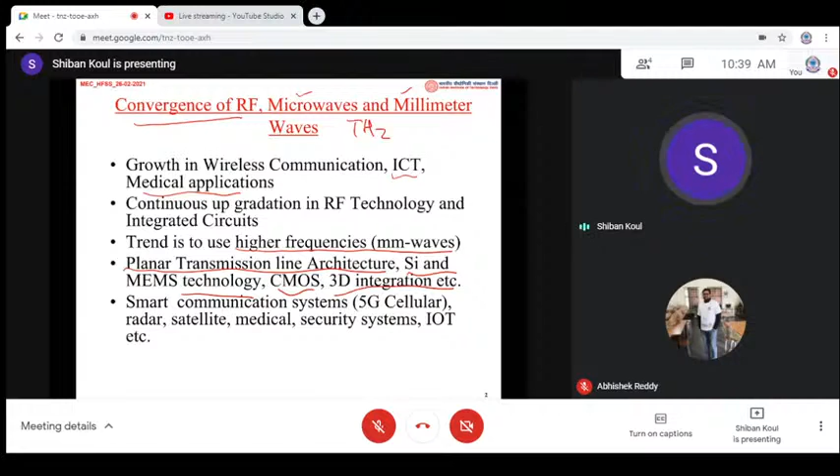The general trend is to use higher frequency. 5G uses 6 gigahertz, 28 gigahertz, 38 gigahertz, 60 gigahertz, and now 6G is going beyond 60 gigahertz. We need to learn about planar transmission line architecture, silicon MEMS technology, CMOS, 3D, GaN - all these technologies. Hyderabad has excellent facilities, both in defense, GAETEC, and other places.

We need smart communication systems - 5G, cellular, radar, satellite, medical. It's very important, the education which we impart to students; they have to be trained so they can get better jobs in these futuristic areas. This is very important.

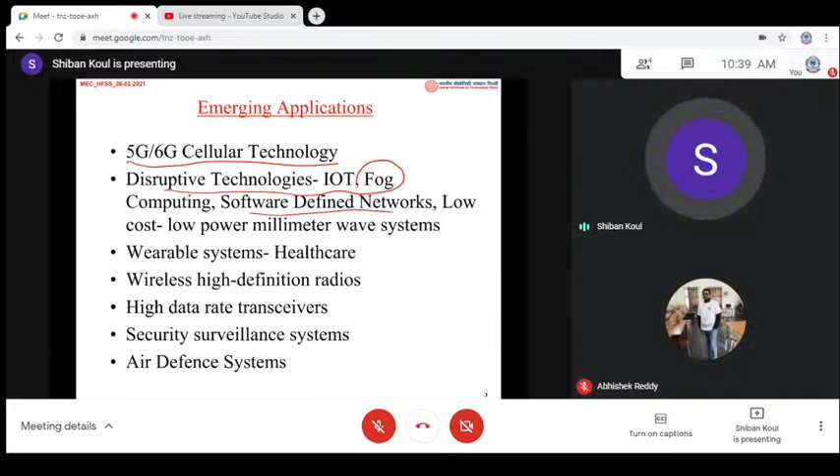These are the emerging areas: 5G, 6G, cellular technology, disruptive technology, Internet of Things, fog computing, software-defined networks, low-cost millimeter wave systems - extremely useful for healthcare. Then wireless high-definition radios, high data rate transceivers, security systems, air defense systems. If students are trained a bit in these areas, they will have a much better future.

We started way back in 1897 with Sir J.C. Bose. He demonstrated millimeter waves, which we now use for 5G - he made polarizers, semiconductor devices, dielectric lenses, which are still at the Bose Institute in Calcutta. Some of his work was reported in IEEE in 1997, an excellent paper on the contributions he made.

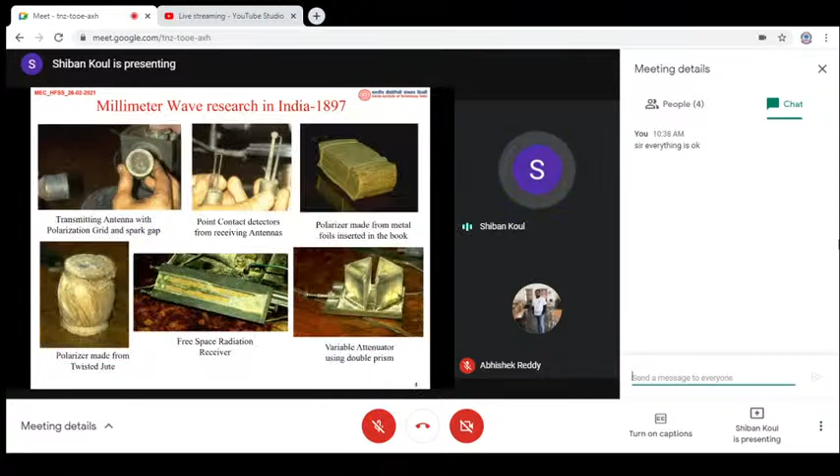At IIT Delhi, we started millimeter wave work in 1979 when we conducted the first workshop. At that time, we didn't know millimeter waves would become so useful that today everybody talks of millimeter waves. These are the things Sir J.C. Bose did: antenna, transmitting antenna, point contact detectors, polarizers made out of jute - he had a vision. Free space radiation receiver, variable attenuator - there was no CST or HFSS at that time, but today we have excellent tools, so we can do wonderful things in India.

This is true, and many colleges don't even have these courses now. They are slowly going into AI, ML - all those things are okay, but I think if you want indigenous development, these are very important, especially with the boom in commercial applications of microwave and millimeter waves. So it's very important.

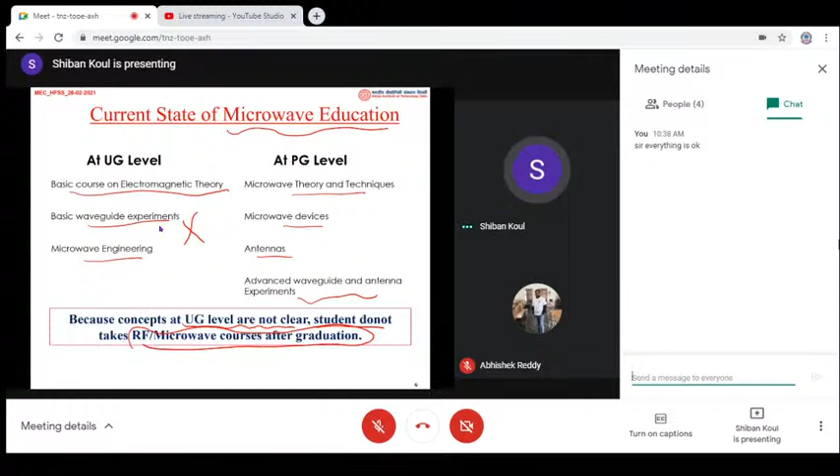The need of the day is to keep abreast of RF to millimeter wave circuit design and technology. It is not desirable, it is mandatory. In future, everything will be in the millimeter wave area. Insufficient design education and hardware exposure is creating a vacuum.

We only teach students how to pass exams; we don't give them hardware education. So there is a need for hardcore RF engineers equipped with design know-how. Like in this workshop, I'm glad that HFSS will be teaching you how to use HFSS for developing circuits, along with practical knowledge.

You have to dirty your hands in the lab to translate these circuits into a practical reality. Keeping in view cost, reliability, and defense application, cost is not a problem, but if you look at commercial application, every dollar makes a difference. So this is not to be done in the industry, this is to be done in the engineering colleges itself.

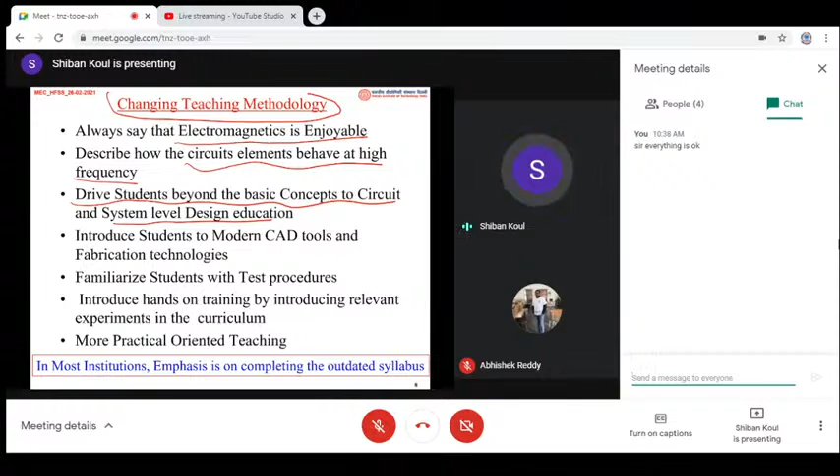It's very important: when a student goes and works with Sandeep, he doesn't have any knowledge. So Sandeep would like to have a person who has some system level or circuit level experience. Then he can use him much better to develop the practical circuits.

We introduced modern CAD tools, and I'm glad that you're conducting this workshop on HFSS, thanks to the HFSS team. We have to also familiarize students with test procedures, introduce hands-on training by introducing relevant experiments in the curriculum. And this is the mantra.

More practical oriented teaching—but in most institutions the emphasis is on completing the syllabus which is already outdated. We are interested in finishing the syllabus, not in how much a student has learned. So we need to change the total methodology of teaching electromagnetics.

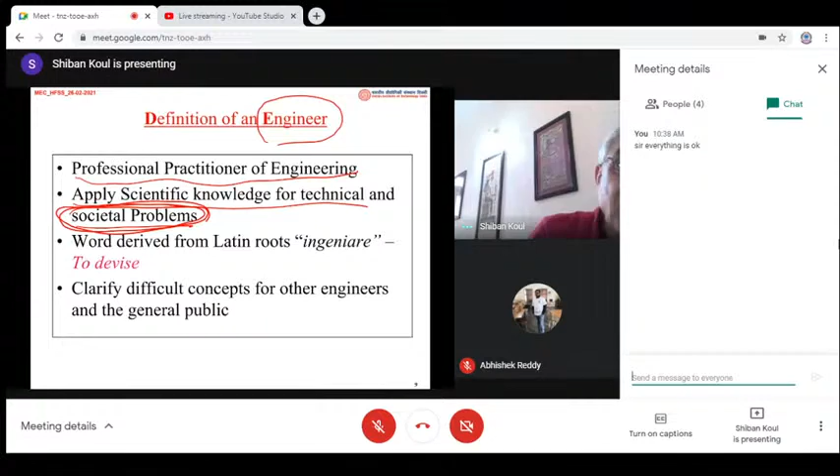Most students who become engineers don't know what their job really is. We don't tell them it's basically a professional practitioner of engineering, applying scientific knowledge for technical and societal problems. We miss this. You have seen COVID—we wanted a lot of societal problems to be sorted, whether it is a ventilator or an X-ray to check whether you have COVID or not.

If you look at the Latin roots of engineer, it basically means to devise. We are supposed to devise, not mug up and pass the exam. Do we do it? No. We have to clarify difficult concepts for other engineers and the general public. We owe a lot to the general public, but we don't actually do anything for the society.

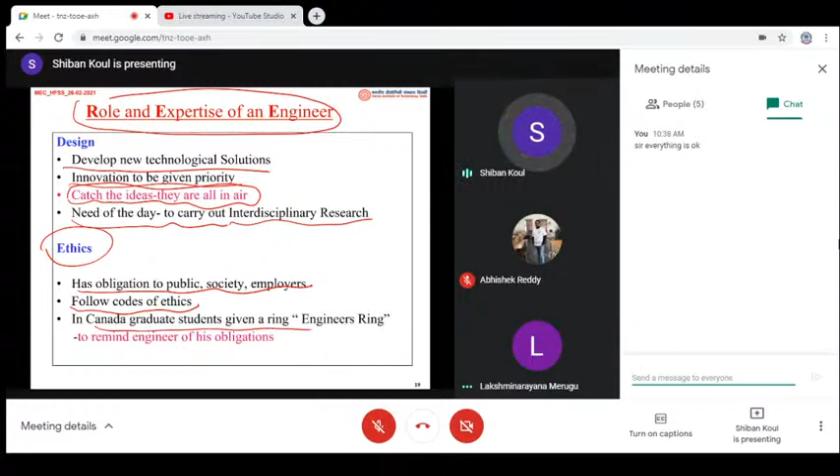College spends so much money—like this HFSS workshop costs money, and MTT-Society supports it. In Canada, they are given a ring called the Engineer's Ring, which reminds you of your obligation. In India we don't give you a ring, but please remember, when you spend 4 years at an engineering college, you have used a lot of taxpayers' money, so you have to give back to society. That's something you need to think about.

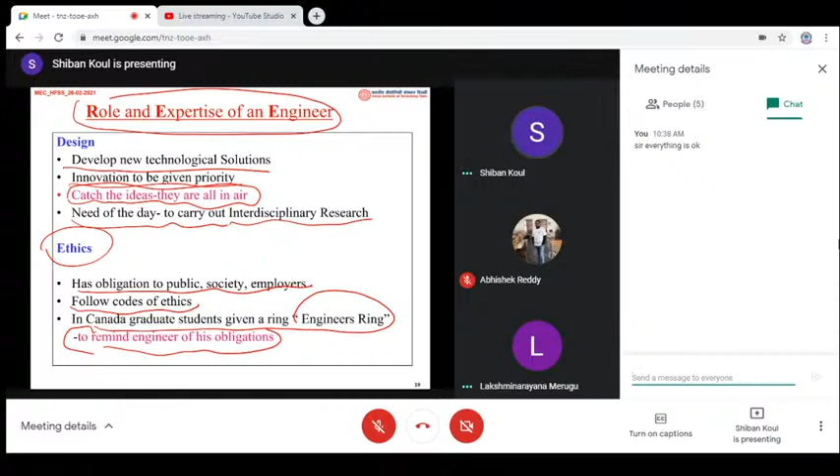Now I will briefly tell you the role of IEEE MTTS. As I said, we already have a problem with the curriculum—it's an AICTE curriculum and it's outdated. We don't revise it, so we ask students to follow the curriculum and complete the experiments. So how will a student get training so that his career is shaped for better things? This is where the society, called IEEE Microwave Theory and Techniques Society, pitches in.

So these are the things—first of all, to get these benefits, you have to be a member of IEEE MTTS. I'm sure Srinivasan made many of you members, but I think in Hyderabad we can have thousands of members. Join MTTS, and you will have access to high quality webinars—I think every day there is a webinar, giving you access to information about the latest technologies. You have distinguished microwave lecturers, speakers, and speaker bureau programs.

So you can make use of it depending on whether you want wireless power transfer, GAN devices, or MMICs—there is a Distinguished Microwave Lecturer available. You also have high quality journals for publishing research work. If you publish the research work, it gives you promotions and it gives you satisfaction that you could do it.

You can do patenting, which is called IP, and you can sell these products into companies. There's also participation in world-class conferences, national and international. International Microwave Symposium is the best, but we also brought a conference to India called IMARC, which is also international.

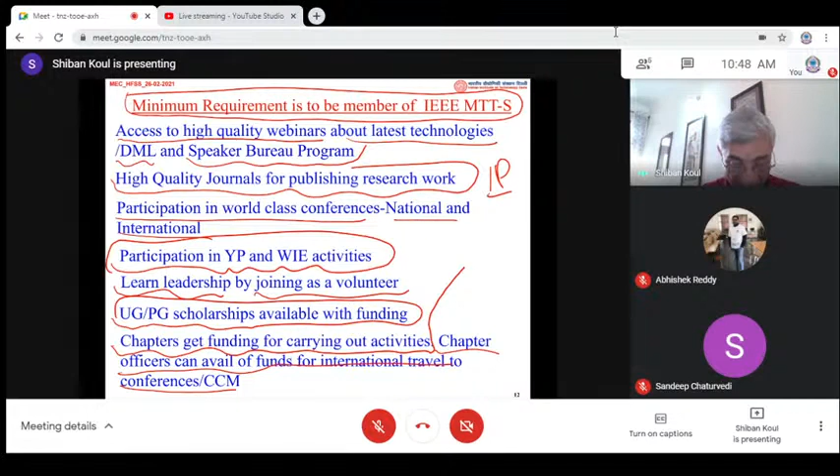Then you have several chapters. They get funding to carry out activities, $1,000 plus $500. If you join a chapter, $500, and chapter officers can avail funding for international travel and conferences to attend the chapter chairperson's meeting. Right now it's all virtual, but from June onwards you can physically attend and meet people. There are a lot of benefits—I can talk for a full hour on the benefits of the society chapters.

Then there are the publications: your Microwave Magazine, then IEEE Transactions. If you get a paper in IEEE Transactions, it's like getting a gold medal. Also Microwave and Wireless Technology Letters, Terahertz Science and Technology, Electromagnetics in Biology and Medicine, and this very recent IEEE Journal of Microwaves.

And then we have Transactions on Radar Systems, Multiphysics Computational Techniques, on Quantum Engineering. It keeps going basically from megahertz to terahertz technology. From India we publish very little, because we don't train our students how to have high quality publications. Maybe we can give a separate talk later on this area.

Then there are conferences worldwide. You can see several conferences going on—APMC conference was in China, then International Wireless Communication conference. Then there's IMARC, which is scheduled for 2021 in Kanpur. Please prepare now and publish papers in that one, and you get an opportunity to come to these conferences and interact with people.

You will learn a lot—ten times more than you can learn by attending a class. That doesn't mean you should miss the class. You should also attend classes, and do this side by side.

Recently they defined the MTT-S scope, and this is basically the spectrum—we have RF device components and circuits. And as I said, you are in Hyderabad, which is basically the father and mother of RF technology. So many companies, GAETEC is there, foundries are there.

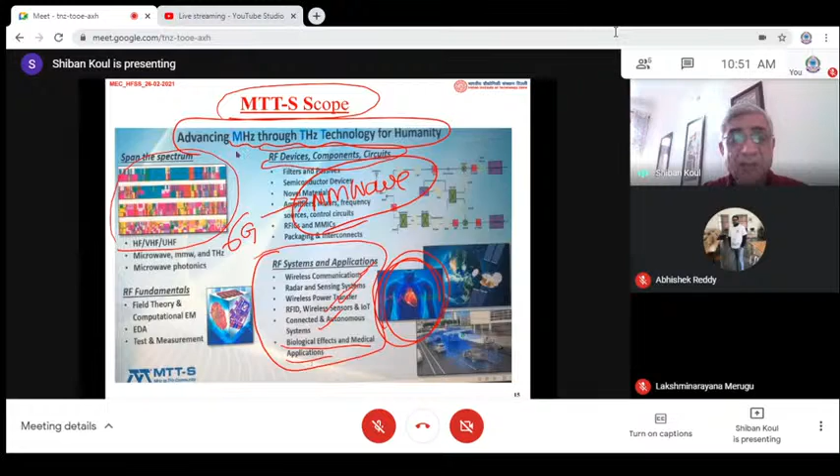Now coming back—this is very important, I have not announced it yet. Hurry and join MTT-S soon, maybe tomorrow, because from India I'm trying to generate some money, and we are now starting scholarships. Thirty scholarships in the beginning will be announced soon; I will send it to all chapter chairs first. This is basically for undergraduate and postgraduate, male and female, equally distributed, for those interested in doing a project with an identified mentor in the RF microwave area. If you get selected—thirty is a large number—you get a fellowship of 10,000 rupees.

All the selected students who do the work will be invited to attend IMARC 21 with free registration and a travel grant to present the work done in the project. Look for this—within 15-20 days you will have this announcement. Apply, but the most important thing is you have to be an MTT member. Please hurry and join MTT-S and you will get these kinds of benefits.

So with these few words about MTT, we will now go to a technical topic, which is basically the development of some antennas for 5G applications. So let's go to part 2.

Low-cost 5G antenna design and development. See, we don't bother about cost in India, and we talk of 5G, which is basically software. We don't look at how do we design antennas for our base stations and handsets, and we don't bother about design and development. So I would like to go through this. This work is done all by students.

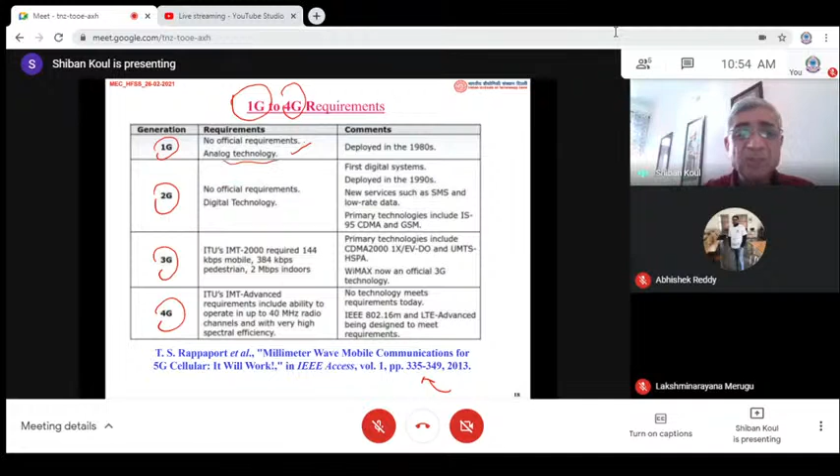So no excuses today. Look at it, we started many years back, 1G to 4G. This is a very good article, 2013. 1G, there was no official requirement. It was basically an analog technology deployed in the 80s. 2G was basically a digital technology, so first digital systems were deployed in the 1990s, and we had CDMA, GSM. Then 3G started basically; primary technologies include CDMA 2000 and UMTS and WiMAX as official 3G technology.

Though we say that in India we have 5G now, we don't have 5G. We still have 3G plus. And people say, I use Vodafone 4G - it's not 4G at all. 80% of the time signal doesn't come. But we are thankful to Jio; they really have an excellent Jio fiber network. You can see this presentation is done on the Jio Wi-Fi.

So 4G, basically, we operated up to 40 megahertz radio channels with very high spectral efficiency, and IEEE 802.16 and LTE advanced. This is being designed to meet the requirement, which is basically long-term evolution, LTE, is 3.5G. So millimeter wave mobile communication of 5G cellular - will it work? Answer is yes, it will work.

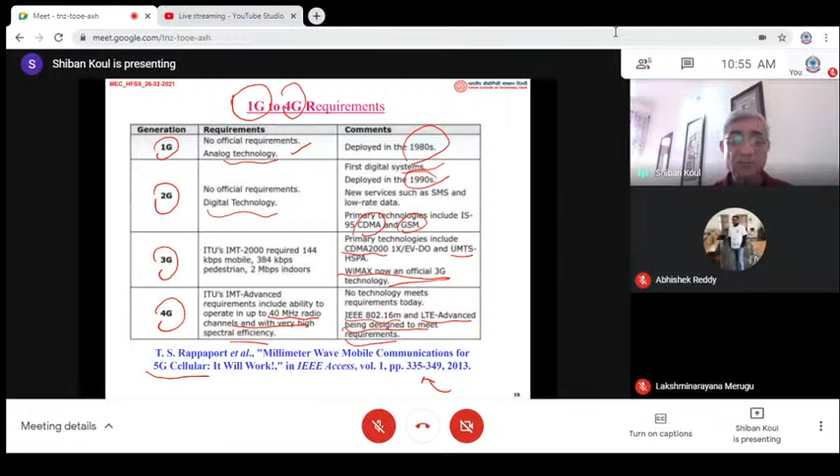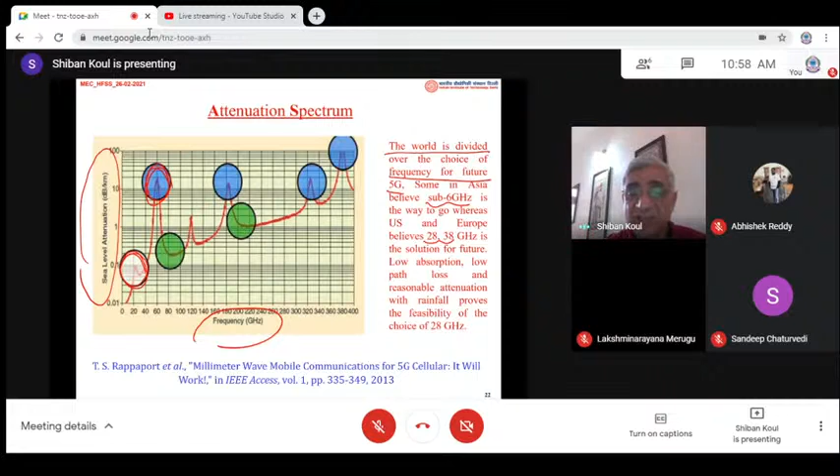The world is divided on the choice of frequency for future 5G. In Asia, some use sub 6 GHz, Europe uses 28, 38 gigahertz, and some are thinking of 60 gigahertz. The main problem is balancing low absorption, low path loss, and reasonable attenuation with rainfall. 28 gigahertz is advantageous, but people have to move to higher frequency because of data rates.

There's a nice article from 2013, 'Millimeter Wave Mobile for 5G Cellular: It Will Work!' 28 gigahertz has been identified, 38 gigahertz another, but in Japan they're looking at 60 gigahertz for short range links, with 6G going beyond this frequency. So we need antennas with high gain, diversity, and phasing, and most importantly very low cost for commercial application.

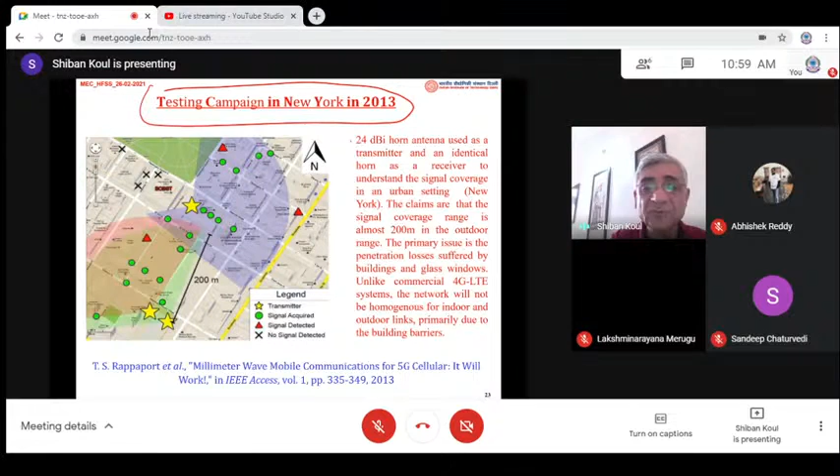In 2013, there was a testing campaign in New York, which is very congested. They used 24 dBi horns as transmitter and identical horns as receiver. The distance where transmission was possible was around 200 meters; otherwise there was a lot of path loss and signal coverage disruption because of buildings. So typically about 200 meters outdoor range was found by the researchers in this campaign.

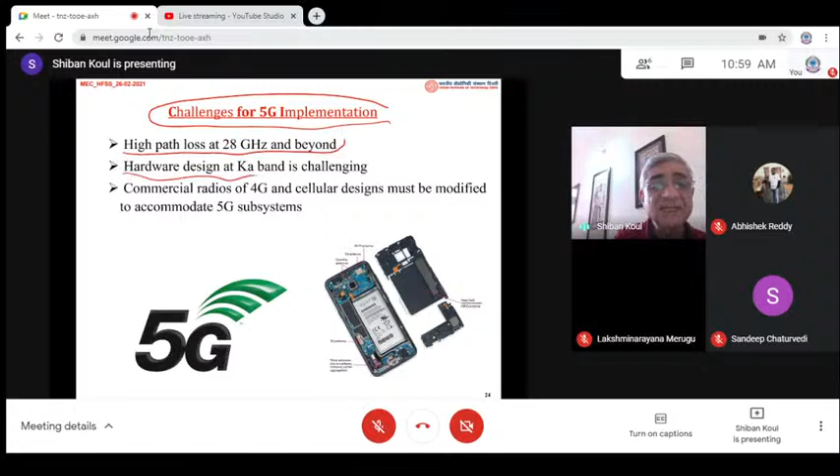What are the challenges for 5G implementation? We have high path loss at 28 GHz and beyond. Hardware design at Ka band is challenging. Commercial radios for 4G and cellular design must be modified to accommodate 5G. We don't want to throw away 4G - can we have 5G in it?

This is a typical mobile handset. Can we have some antennas in this which will basically be 5G, while already having 4G built in, so both 4G and 5G are combined into the cellular phone? Then the cost will be much lower.

Requirements of a millimeter wave 5G mobile terminal: high gain greater than 9 dBi, beam steering or pattern diversity, impedance bandwidth greater than 1 GHz, angular coverage at least 60 degrees, and it should fit inside commercial smartphones. Typical size is 150 by 60 by 6 millimeters. I don't want to do research where I make a 300 by 300 by 300 millimeter antenna.

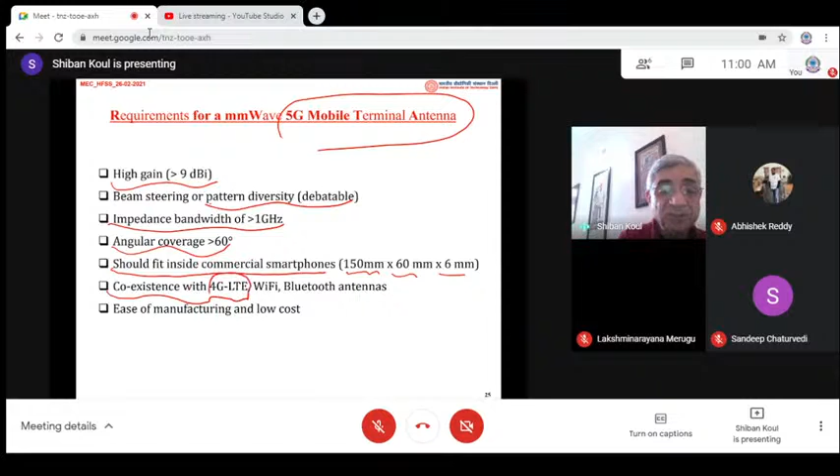Nobody will take it. Can this coexist with 4G LTE, Wi-Fi, and Bluetooth antennas? It has to be very easy to manufacture and extremely low cost - the antenna should be $1 or $2. Then only will commercial companies be interested.

So it's very important to draw these things out on paper before we actually start developing them.

Samsung did pioneering work on phased array around 28 GHz. They looked at propagation loss between transmitter and receiver. An isotropic transmitter-receiver at 30 gigahertz has very high loss theoretically, while an isotropic transmitter-receiver at 3 gigahertz has very low loss. But we can use an array at 30 gigahertz to get very low loss too.

A patch antenna at 3 gigahertz is 60 millimeter by 60 millimeter. We can make an antenna array at the same 60 by 60 millimeter size that works at 30 gigahertz. So we can use a small phased array in the mobile, and have this work for 5G applications.

The path loss issue could be overcome by using high gain antennas on both mobile and base station, but locking the beam is a very tough job. People are still debating whether millimeter wave beamforming is an enabling solution, or if there are problems - this paper describes those problems. So people are thinking, should I use phased array or pattern diversity? This is still debatable, but loss at 30 versus 3 gigahertz is considerably different, at least a factor of 20 dB.

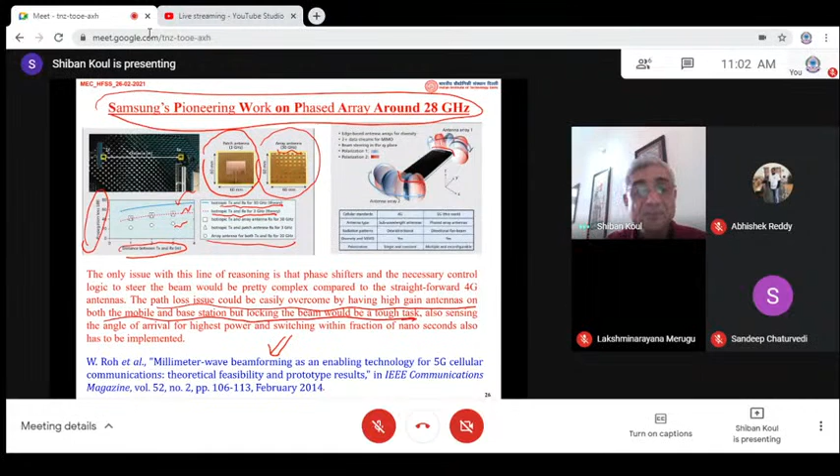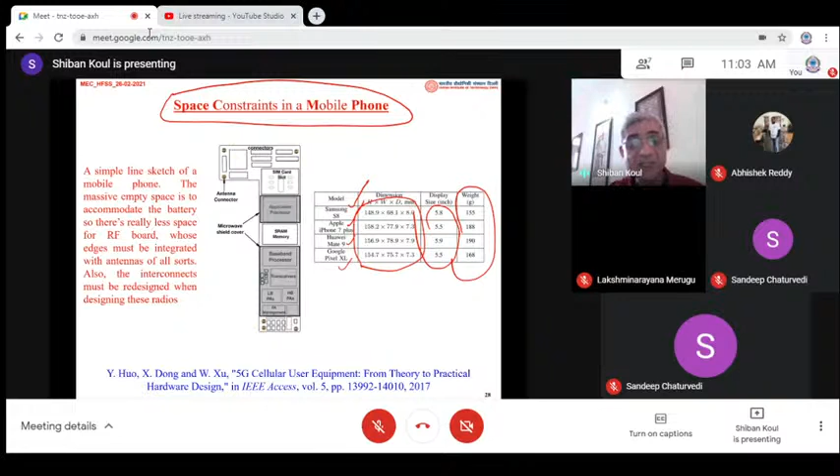Then we have space constraints in the mobile phone. If you look at a mobile phone, half of it is practically the battery. Looking at Samsung, iPhone, Huawei, Google, the size is very small, display size is 5.8 inches, and the weight is limited. So we have to try to accommodate 5G antennas into this phone to get the functionality, without having to redesign everything in the phone.

So this is a typical 4G current phone. Can we introduce an antenna on the periphery of the same phone, which would be a millimeter wave antenna, with control signals, so that it becomes a 5G phone? There are papers as old as 2017 on millimeter wave 5G antennas for smartphones, and a lot of research has been done in this area, but nobody knows which is the correct solution. We already have Bluetooth, GPS, and LTE antennas, so we have to find some space in the mobile for future 5G applications.

Our students found there are several research gaps in 5G designs. Most reported designs are planar in nature, hence creating a large footprint, and I cannot fix that in a mobile. I can publish a paper, but I cannot fit it in a mobile. So this is the footprint of a planar antenna.

So what we thought was, can we do a corner bend? If I bend this antenna, it will save a lot of space. Second, with a planar antenna, the radiation is quite a bit towards you. But if we use a corner bend antenna, I can direct it towards the base station, which helps radiate the signal away from you, and you get less SAR by using the corner bend.

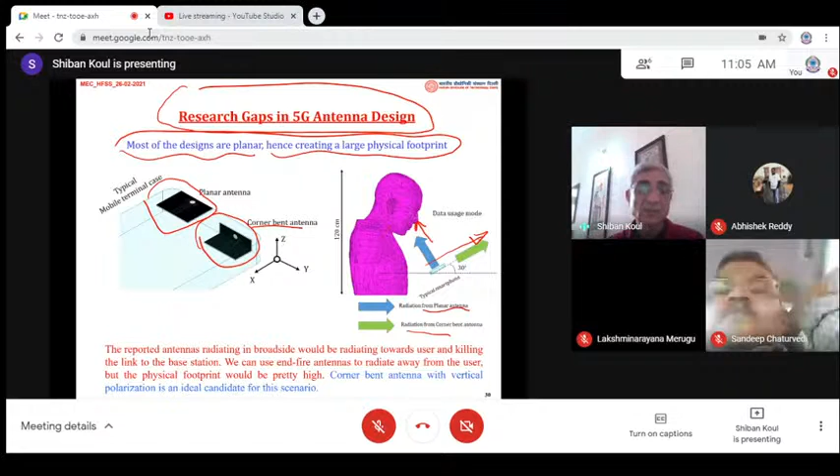So this was the starting point for our students - can we do a corner bend antenna? We went ahead with it and designed a conformal wideband slot antenna for 5G applications, published in 2019 in IEEE Access. We use a coplanar waveguide here, with a slot. You can use HFSS to optimize this, and you can go through the paper in detail.

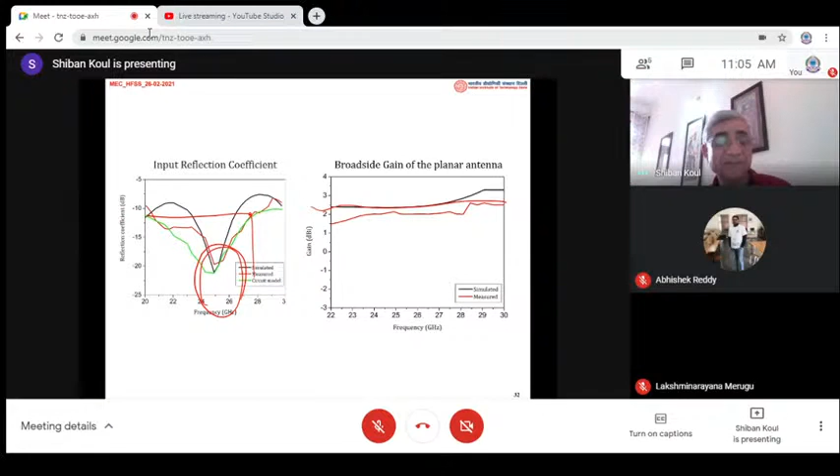So this is a very nice antenna which works. The footprint is 20 millimeter by 16 millimeter, but it's too big to be attached to a mobile. We see the broadside gain is typically about 2 dBi, and the input reflection coefficient around 25, 26, even 28 gigahertz is better than 10 dB. We can change the dimensions to accommodate 28 gigahertz. These were initial studies, but the gain is still low. These are the patterns at 28 gigahertz - reasonably good.

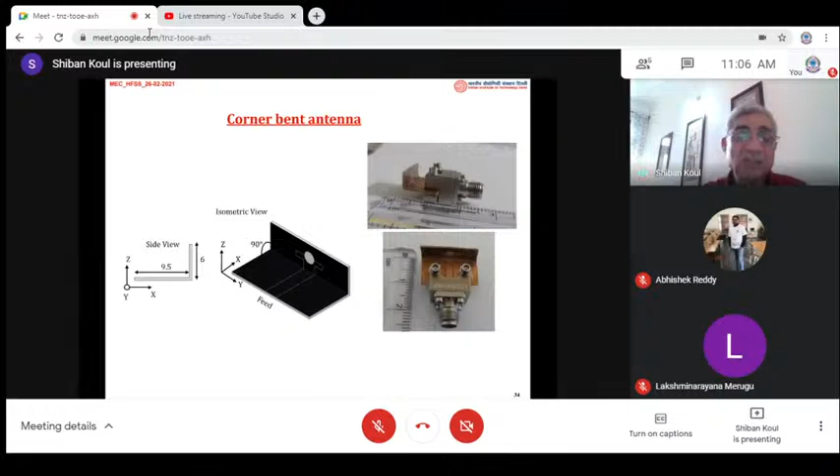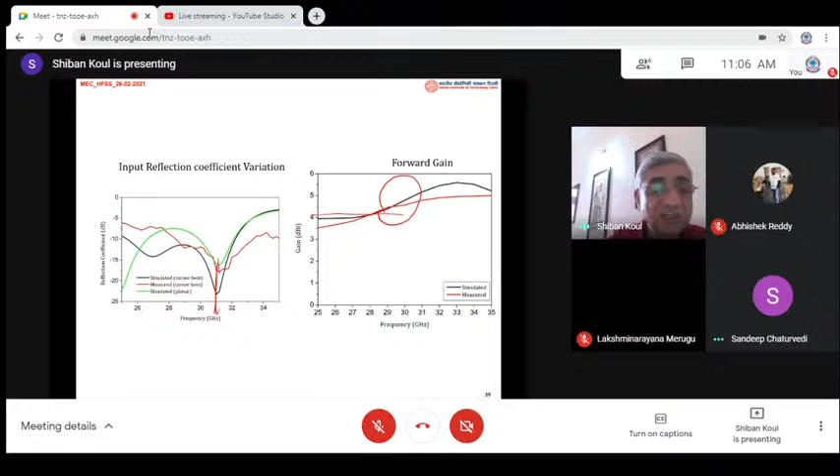Then we looked at the corner bent antenna - can we bend this antenna? Yes, it was bent, and using a southwest connector we can connect this and get a nice corner bent. Now the footprint becomes very small, 9.5 millimeter by 6 millimeter, so I can fit it in the periphery of the mobile. The gain improves - forward gain becomes 4 dBi, and the return loss around 28 gigahertz is about 10 dB.

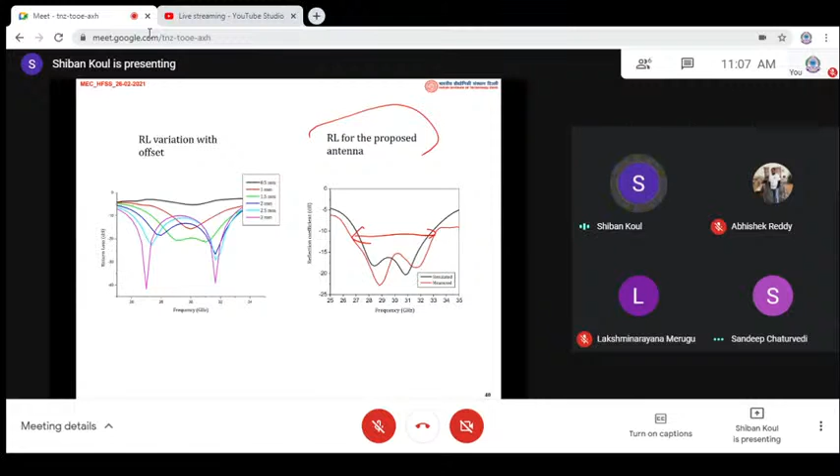Return loss of the antenna now is very broad. Bandwidth is large, and with offset, we can change the offset and see different characteristics.

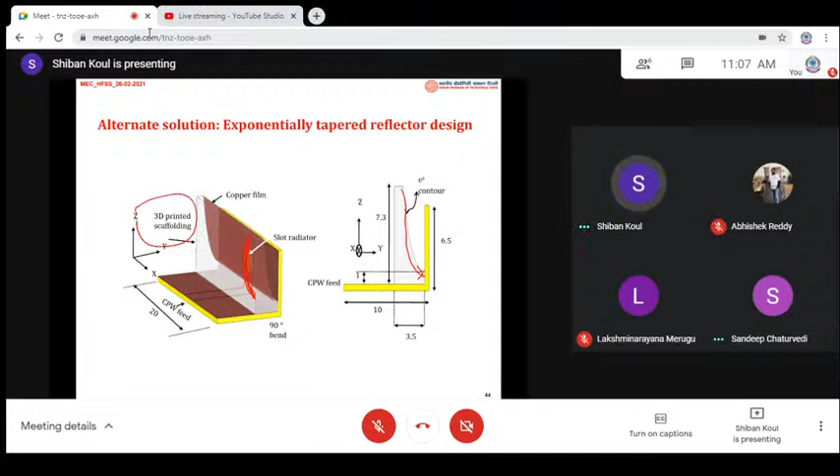Now the next thing is, instead of having this one, can we have a 3D printed copper film, and have a contoured reflector to get much better characteristics? So this was done using 3D printed scaffolding, and we had an exponentially tapered reflector design.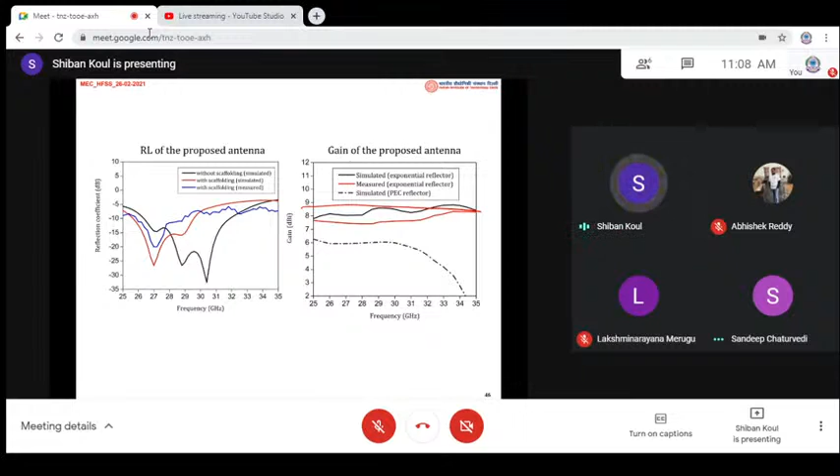The ultimate aim is that it should directly fit into the mobile. This is the patterns at 28, 30 gigahertz, showing the co and cross polarized patterns.

Now, when you look at typical uses of the mobile phone, we can use it in portrait mode or landscape mode. When we have to do data or make a call, we use portrait mode, or when we have to send an email, we use landscape mode.

So there is the problem of the phased array. We can have this antenna, combine multiple antennas, and get the beam scanned in different directions. This is the concept of the phased array, but there are problems.

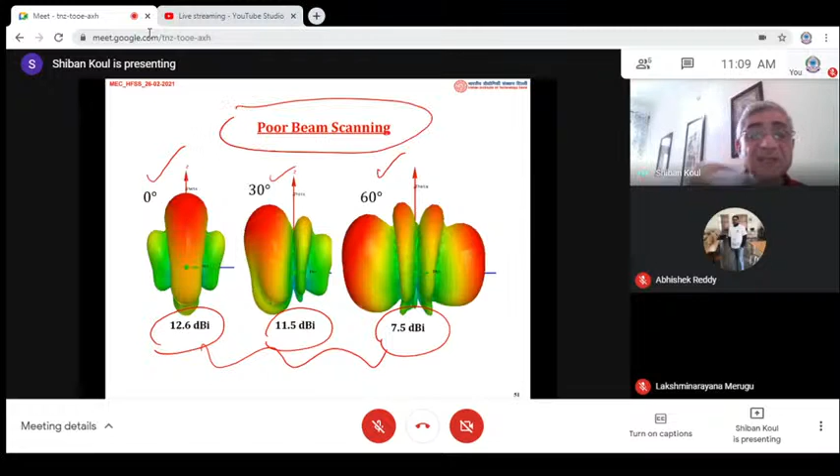What is the problem? At 0 degrees we get 12.6 dBi, at 30 degrees 11.5 dBi, at 60 degrees 7.5 dBi. So we need to compensate for this gain, and there's poor beam scanning as far as the phased array is concerned. So we decided on an orthogonal pattern diversity module to overcome this problem.

This is your radiating element, and this is your feed element. This is how the details of the radiating element are. This is also very recently published by us. This is a coplanar feed, and this is the radiating element for the pattern diversity module.

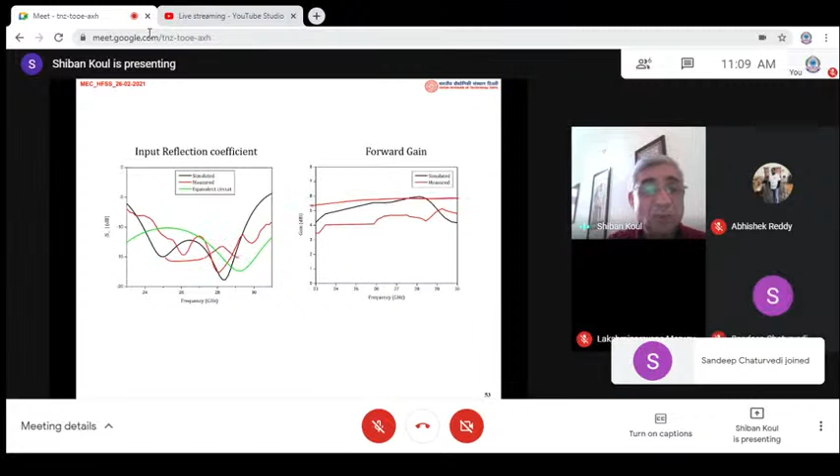Then we can check the gain, which is about 5 dB, and the return loss is very nice over the frequency of operation. Patterns are very nice.

Then we use the FSS structure and analyze this separately so that we can have gain enhancement. So we use this as a reflector here, and then we do corner bend for this antenna the way we did earlier. So we have a nice antenna.

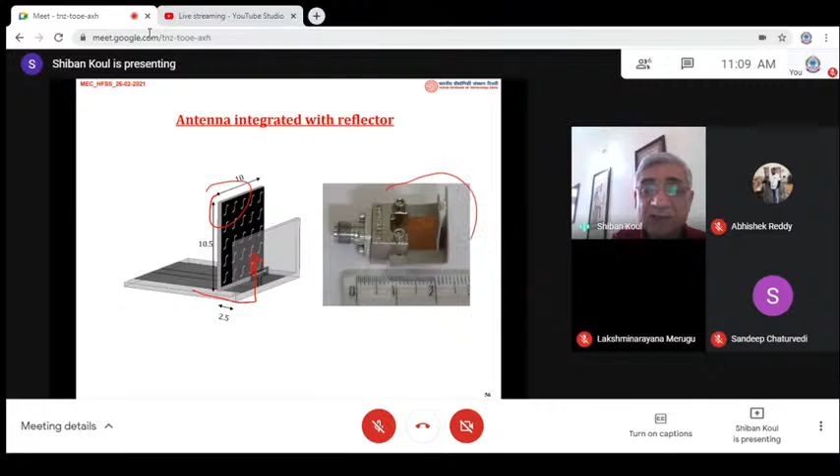Integrated with the reflector, we can get almost 6-7 dB gain and a very good return loss over a broadband for this particular antenna. These are the H-plane patterns, these are the E-plane patterns for this particular antenna.

This is the 3D pattern without and with FSS at 28 gigahertz. It's very interesting results we are getting.

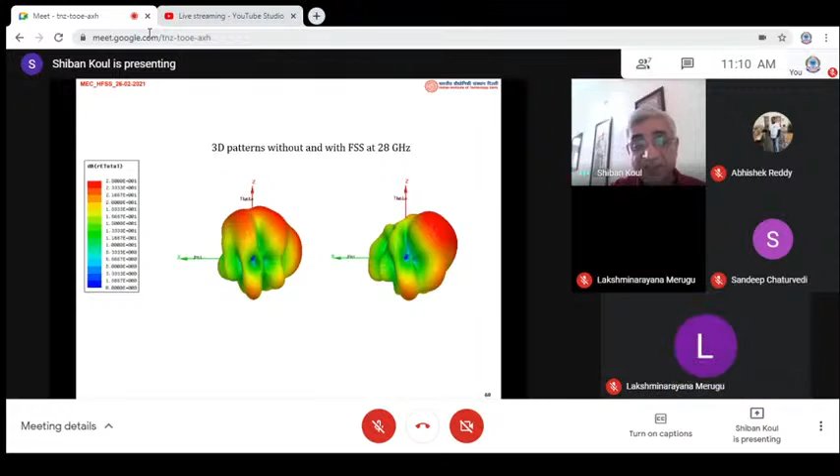So we can have much better results, because whenever we go to 5G, a lot of questions are asked. One person who frequently asks this question is our own close friend from IIT Bombay, Girish, who always says it has health hazards. So whenever we propose designs, we should take into account the specific absorption rate. This is very, very important.

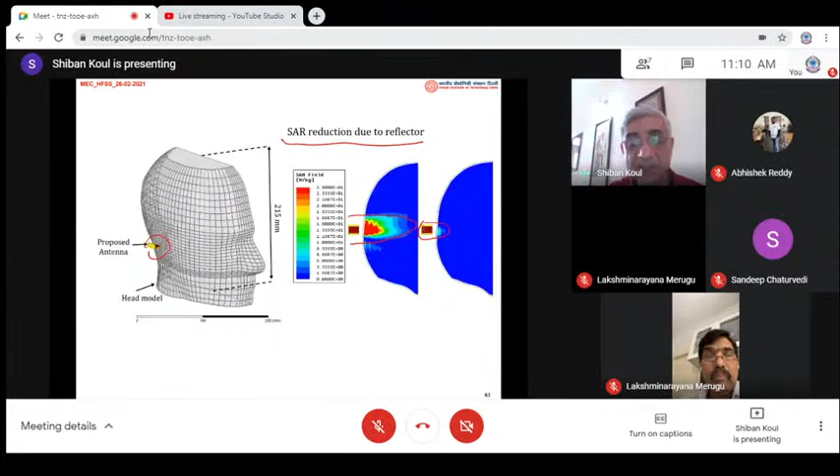So this design gives you much lower SAR. Then we can use one antenna at port 1 and one antenna at port 2, which gives me pattern diversity with the conformal antenna.

So I can have the patterns for both the cases, which eliminates the need for a phased array.

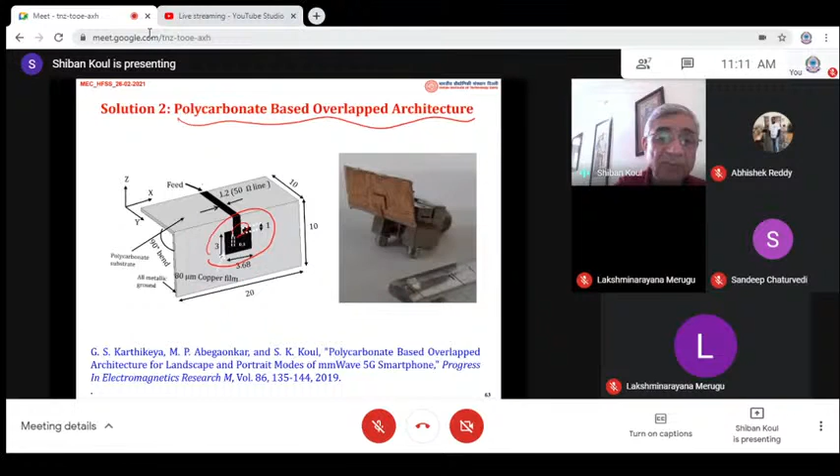The second design is a very low cost polycarbonate based antenna. We use a patch inset feed on polycarbonate substrate, and this has also been published very recently. This is how the antenna looks, and it's less than $1 to manufacture.

We can design another one, basically a tapered slot antenna fed by microstrip, with a quarter wave transformer, again designed on HFSS. This is how the fabricated antenna looks, and then we have both of them overlapped.

This is your slot antenna, and this is your tapered antenna, and together they become a pattern diversity module. The coupling is better than 30 dB between the two antennas, which is very good for practical applications.

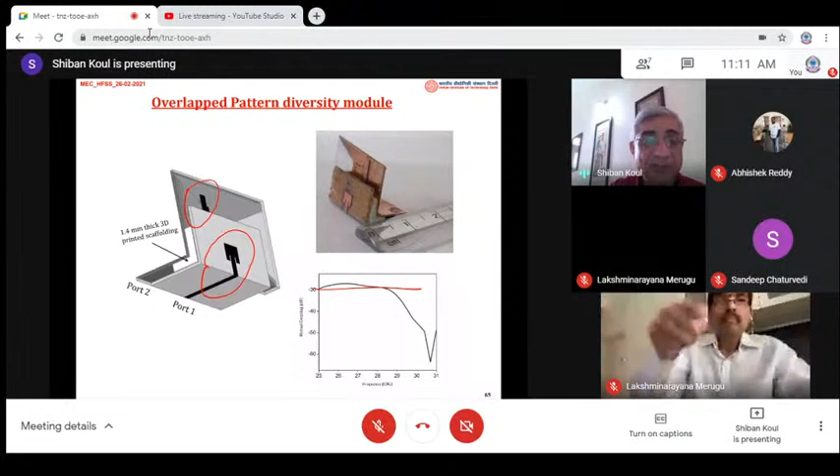This is the E-plane pattern in portrait mode, and this is the pattern in landscape mode. So basically, these diversity modules work very well for a practical application.

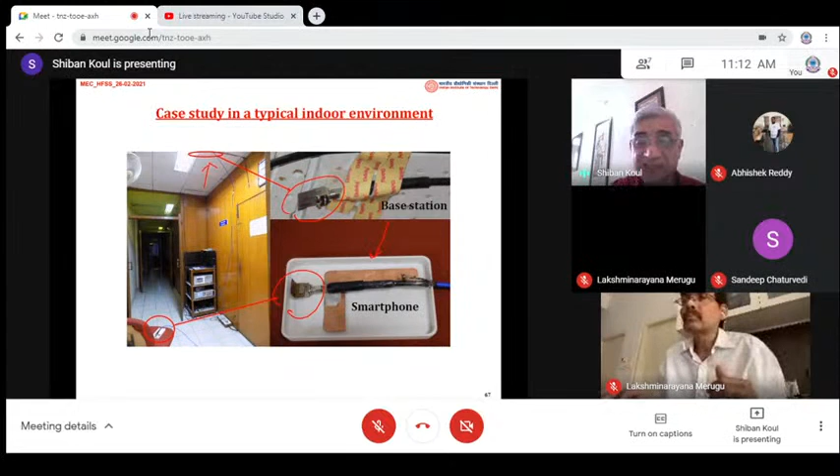The next thing is to test it. So we did a 3D molding of a mobile phone, a smartphone, and mounted these antennas on top, basically on the roof, and did the testing. We wanted to check whether the portrait mode and landscape mode signals are detectable.

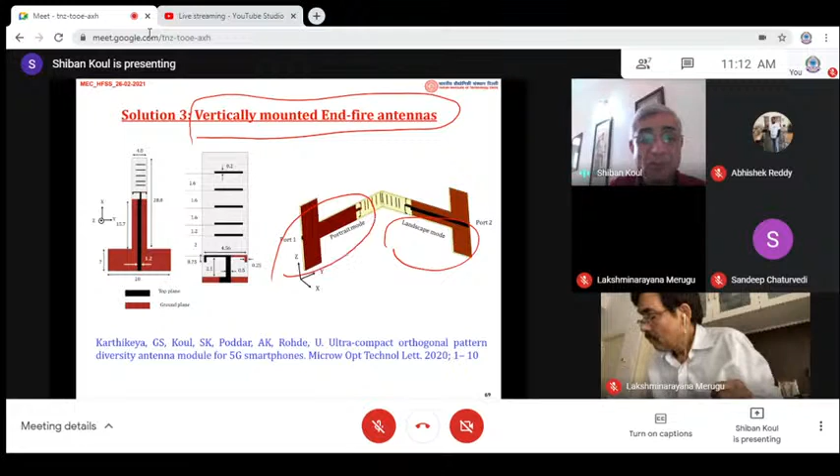So going ahead, we did several other types of antennas. This is a vertically mounted end-fire antenna. We have this portion for landscape mode, this portion for portrait mode, and these are various radiators. This was also done in 2020, very recent.

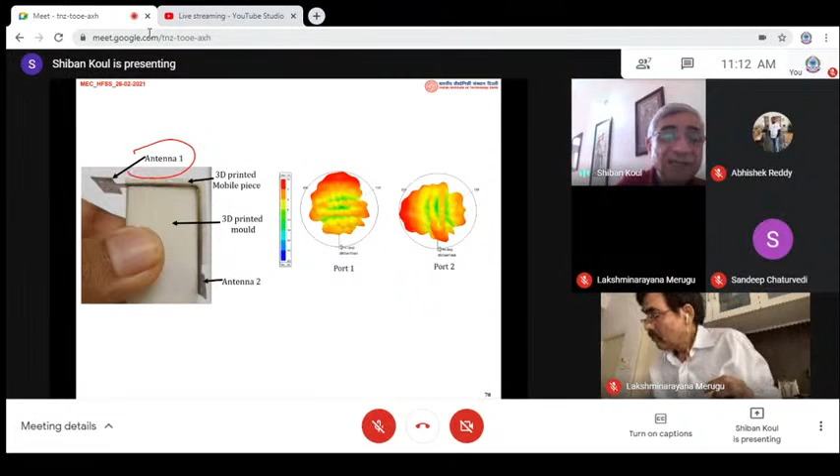This work is very, very recent. If you look at antenna 1 here, this is a 3D printed mobile piece, and this is the second antenna. So these are how the antennas will be fitted onto a practical mobile. This is port 1, port 2 patterns, which takes care of the diversity.

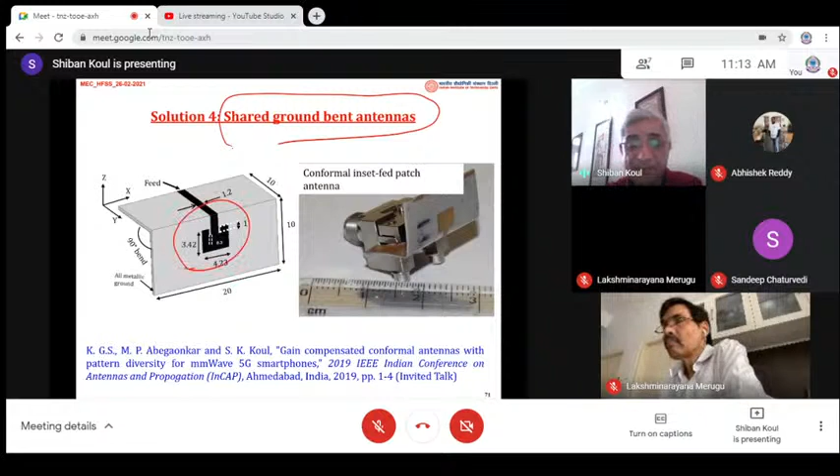The next antenna we did is a shared ground plane bent antenna. We took this antenna, which we showed earlier. This is also a very recent paper which we have published, using the corner bent antenna. This is one of the antennas, a conformal inset fed patch antenna, which has been developed by the students.

Then we use the earlier tapered slot antenna here as the second antenna. So we have a tapered slot antenna here, a tapered slot antenna here, and then port 1, which is basically a microstrip patch antenna.

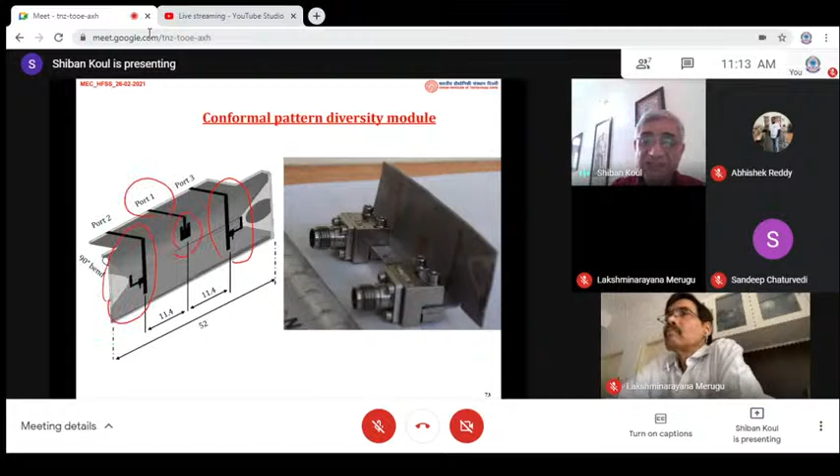This is how an antenna module will look like, which will go into the mobile antenna. There are 2 tapered slot antennas and 1 microstrip patch antenna to take care of the pattern diversity. We can see the beam here, beam here, and beam here to take care of all 3 directions, with mutual coupling better than 40 dB between these 3 antennas.

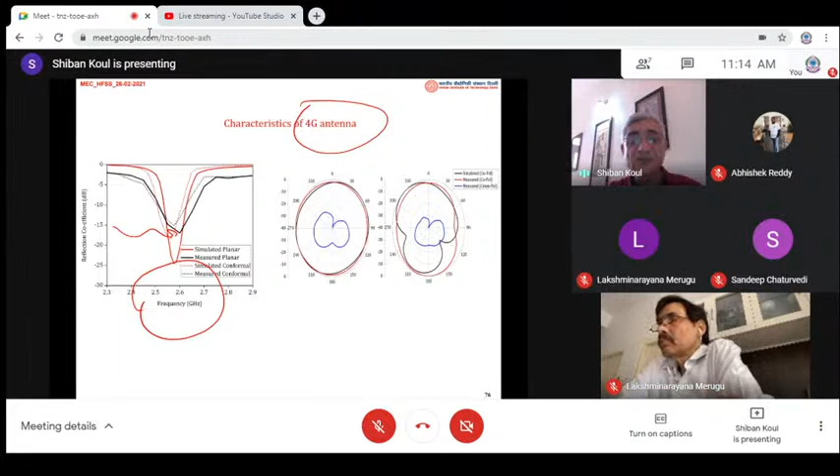If you look at the 4G characteristics, in this particular band it radiates well, the reflection coefficient is very good, and these are the patterns for the antenna. Then we can do 4G MIMO by using 2 antennas, and this can also be integrated onto the same mobile.

Then we can do a 5G antenna, and as I showed you earlier, we can use basically a corner bent antenna, which is a microstrip patch antenna. So we can use at port 1 one antenna, at port 2 another antenna for diversity, whether it is portrait mode or landscape mode.

So basically we can now have a very sophisticated antenna with 5G pattern diversity. We can have 4G antennas, 4G LTE, 4G MIMO, and millimeter wave 5G. This is a very, very small antenna which takes care of both 4G and 5G, and can be very easily fitted onto a mobile phone.

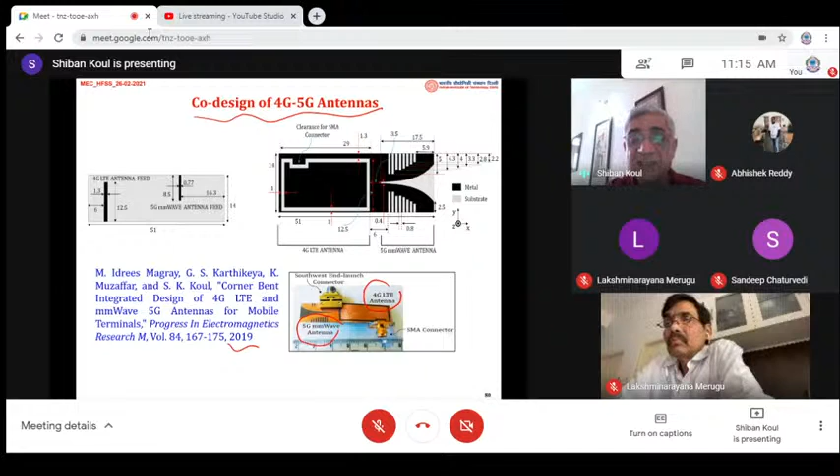So these are other types of 4G antennas which we have done in 2019. It's a very, very small 4G antenna, a slot antenna, and then 5G millimeter wave tapered slot antenna. This is how the layout looks for the 5G antenna, and this is how it looks for the 4G LTE antenna. These are the feed lines for both, and these are the input reflection coefficients for the 4G and for the millimeter wave antenna.

So that means we can make one antenna which basically works for 4G and 5G. This is important because we don't want to throw away the existing mobile. We can integrate this antenna so that both 4G and 5G functionality will be there in this particular mobile.

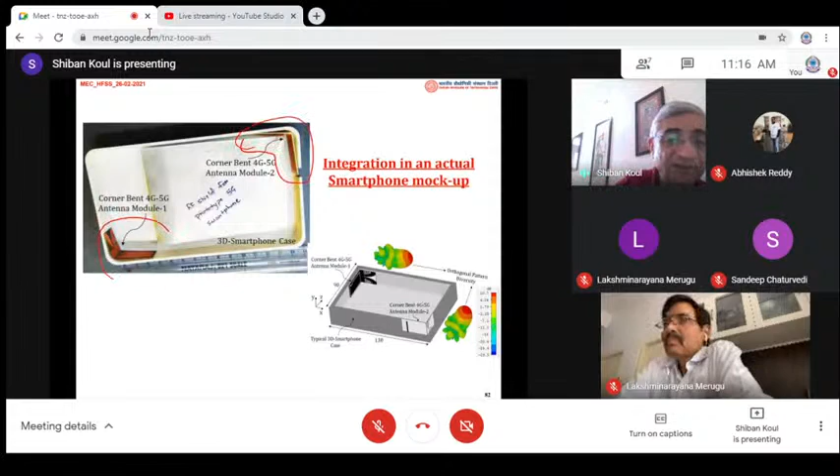So you can look at it. Now we did this corner bent antenna module fitted in the mobile case, and this is corner bent 4G, 5G module into the second corner. This is how it will look like, one corner and another corner of the mobile. This is 130 millimeter. We kept the same dimension, 130 to 90. So this is a typical mobile phone using the 3D.

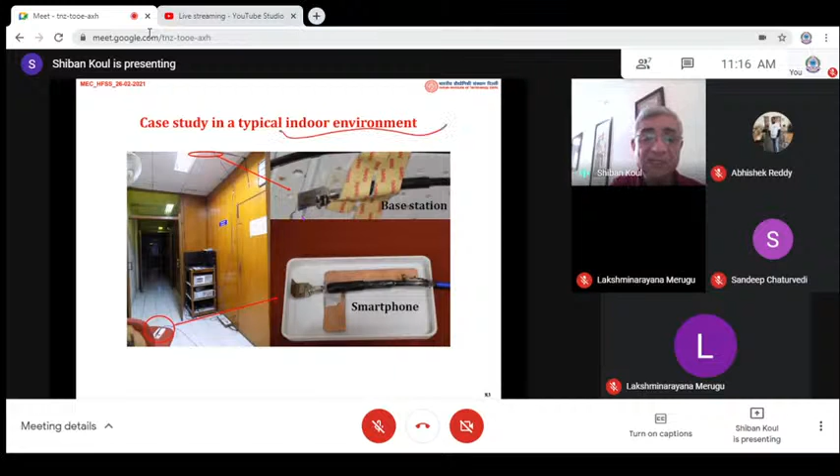And this is your orthogonal pattern diversity from these two antennas. This is an integration into an actual smartphone mock-up. Then we did the case study in the indoor environment. We put these antennas and did it the same way I showed you earlier. We can pick up both 4G receive powers as well as 5G receive powers in an actual scenario. This proves that we can develop very sophisticated antennas for both 4G and 5G.

This is some of the recent work we have done, and there's a lot of literature we have written. In January 2021, last month, we wrote 3 articles on these compact antennas. Article 1 on compact antennas for future 5G smartphones, part 2 is compact antenna for future 5G smartphones, and compact antenna future 5G pattern diversity architecture. This is freely downloadable from the Microwave Journal website. Please go to the website. These 3 articles will give you insight into the latest technology about the future 5G thing.

I and one of my students compiled the work we did, many other designs. Since we have lack of time, we can't cover those designs. So the first book on millimeter wave antennas for 5G applications, which is basically for mobile as well as base stations—I didn't cover the base station antennas, I covered only 5G. This has come out basically in November, December from CRC. These are available online, basically as an ebook. So read these articles, you will get a fairly good idea.

As I said, we used HFSS to design most of these antennas. Since you have a workshop today, make best use of this workshop to learn. This is all done by our students, so you're also students, you can also do exactly the same thing. And there are other interesting talks by the speakers next to me, and also tomorrow Sandeep is there. I think you will get a lot from this workshop.

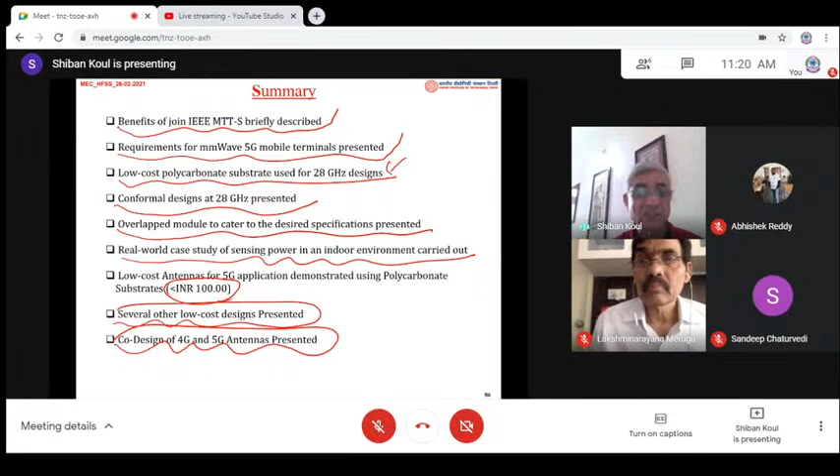And many low cost designs were presented, and if you download this ebook, they are all there. Co-design of 4G 5G antennas was presented. See, we have to understand companies have invested billions of dollars, they don't want to suddenly change everything. So you have to actually sync your thoughts with the thoughts of the company, and then it is possible to actually do meaningful designs.

And with this, I think we come to an end. I acknowledge all my colleagues at IIT Delhi, my PhD students from CARE, Indian Institute of Technology Delhi. As I said, most of the designs, in fact all designs, were done by HFSS. I'm really grateful and thankful to the HFSS team. I don't know whether they are listening to this talk, but Srinivas can give a special thanks to the HFSS team for supporting IIT Delhi and for supporting your college.

We will have many more workshops in future where we will present the actual hardware, and maybe at some point we can do an antenna design workshop where we show you how to fabricate it in your own lab and test it. This is what we will do in future so that you get much more confidence. Grades are important, but I think it's more important to do something with your hands. That's very important.

I'm really thankful to all of you, and to the principal for asking me to give a talk today. I hope you got some feel of what MTT is, why MTT is important, and some feel of the kind of very recent research being done. As I showed you, most of the papers are from 2019, 2020, and the books are from 2021.

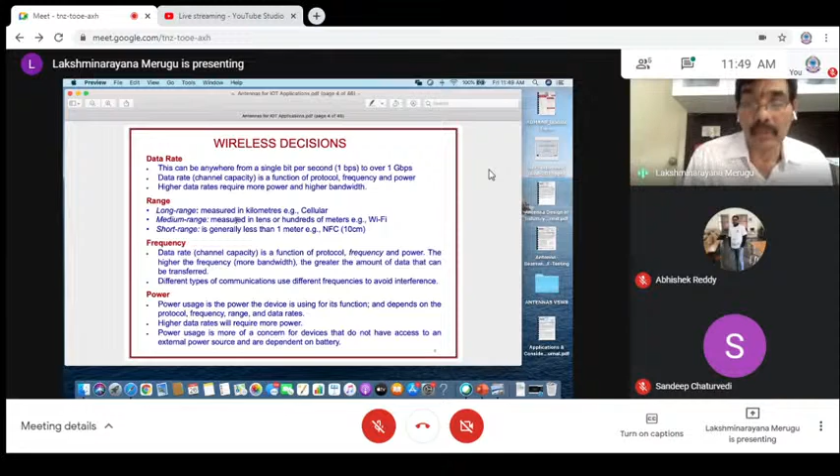Now, what are all the factors which influence the antenna design? Slowly we'll come to the antenna design itself, right? So I am going to tell the fundamentals of antennas, but before that, that is the reason I am telling the requirement of antenna parameters.

Just now, you all listened that for a mobile antenna, the space is not just available like that. We have to design within the available shape, right? And then the material of the antenna is also going to decide the cost and its performance. For instance, FR4 material is almost 10 times cheaper than RT/duroid materials, something like that.

So these are all the things which we need to consider. Then can I use the FR4 antenna for all the frequencies? No, I can't use it beyond X band or beyond 6 gigahertz. The losses are very high. So that is one thing.

And the desired location of the antenna is to be dictated by whether it is embedded, internal, or cabled. Now, in the case of IoT, we will be discussing whether it is an embedded antenna, internal cabled antenna, or something like a chip antenna, or a PCB antenna. We are going to discuss this, right?

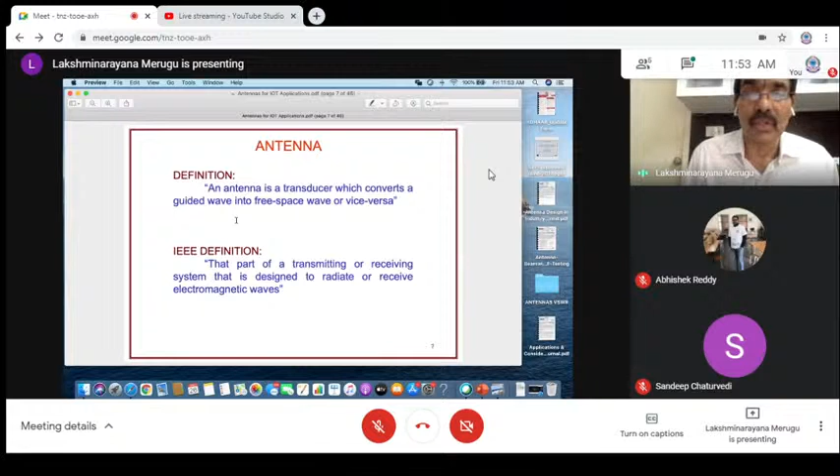Just to be clear, for those who are professionals, may kindly excuse, this is for the students, those who are upcoming students. For them, this is a fundamental talk I am giving. The IEEE definition of the antenna is that part of a transmitting or receiving system that is designed to radiate or receive the electromagnetic waves. Everybody knows this, but it is a formal definition.

The antenna parameters are frequency, radiation pattern, gain, input impedance, bandwidth, and polarization. These are all things I will just explain, which we have already just now. A lot of these words you have heard from Professor Dr. Koul's talk.

Now, coming to the frequency, you can have any frequency, right, from kilohertz to terahertz. Now, of course, the MTT-Society always goes from megahertz to terahertz, but even less than megahertz also we have to go to, with other requirements, particularly EMC, electromagnetic compatibility, as well as the antenna propagation side of things.

The most important thing is that radiation pattern is a graphical representation of the radiation properties of an antenna. What does it mean? Suppose I sit in the middle of the hall, maybe a conference hall, Matrusri engineering conference hall, whatever it is. Suppose student participants are sitting right from the front row to the last row, right? A person sitting in the last row, right corner and left corner, and front row, first corner, left corner, center person, everybody should be able to get the signal.

That means that is the area of coverage. That area of coverage, everything is required. That means signal should reach the required areas. That is what is the radiation pattern.

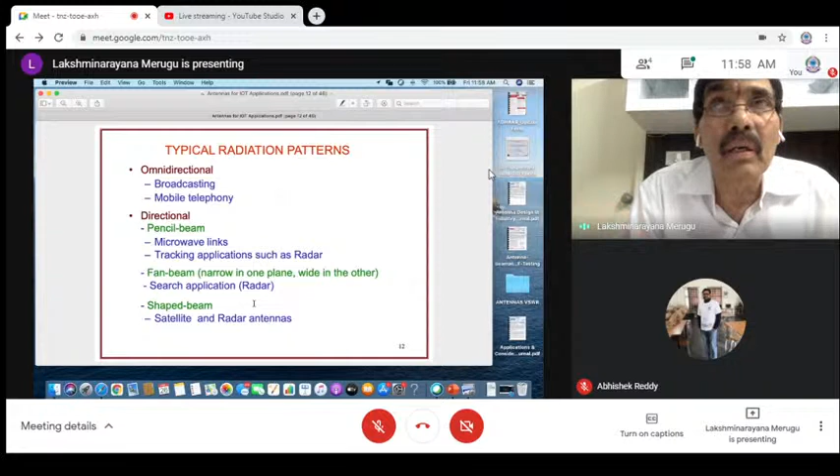But anyway, why am I telling you this - you may get surprised that I told you these are IoT applications, but antennas are antennas. Whether you use it for IoT or radar or communication or all these things, the antenna's general properties are going to be the same - that is, the radiation pattern.

For instance, a fan beam antenna - an aircraft is detected here. Once it is detected, you use a pencil beam for tracking, a small, narrow beam for tracking, like that. Another important thing is the directivity.

How much is the directive gain of a receiving antenna? Now, directivity is defined - this is known, everybody knows it, and it's given in all the books. The concept of directivity is the power or signal received in a particular direction, the power density in a particular direction.

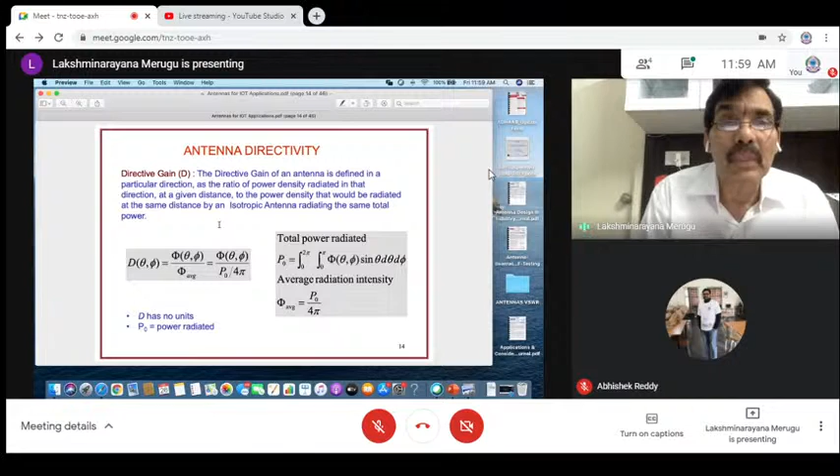Suppose let me say I am starting here, going in the Y direction. I use the antenna and get some power here - some power density. Then in this other direction, I don't receive anything. And the directivity is the power ratio with this one, any input, if this is replaced by an omnidirectional, isotropic antenna.

An isotropic antenna will give complete sphere of radiation - whatever the sphere of radiation, that is 4 pi r square is the area, or 4/3 pi r cube is the volume. That much signal is reoriented in a particular direction. That particular direction, the ratio to when it is fully spherical type, that is called the directivity.

So the gain is directivity multiplied by its efficiency, meaning any power losses from the input to the radiating aperture - that is the feeder loss, whatever is taking place, that we will take into account.

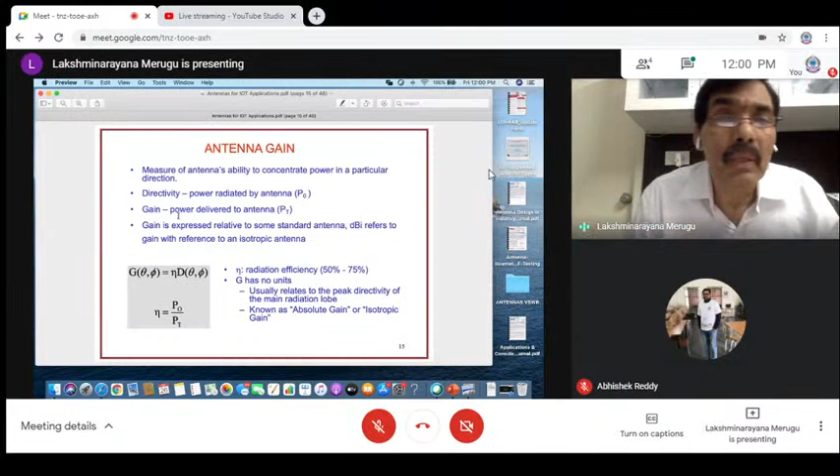Gain is the power delivered to the antenna. That means what is that? Antenna has got two parts - one is the radiating part, that is called the antenna. The power will be given to the antenna by the antenna feed. So at the input of the feed, some loss will be there once it comes to the radiating part. So if that is taken care of, that is what we call the gain of the antenna.

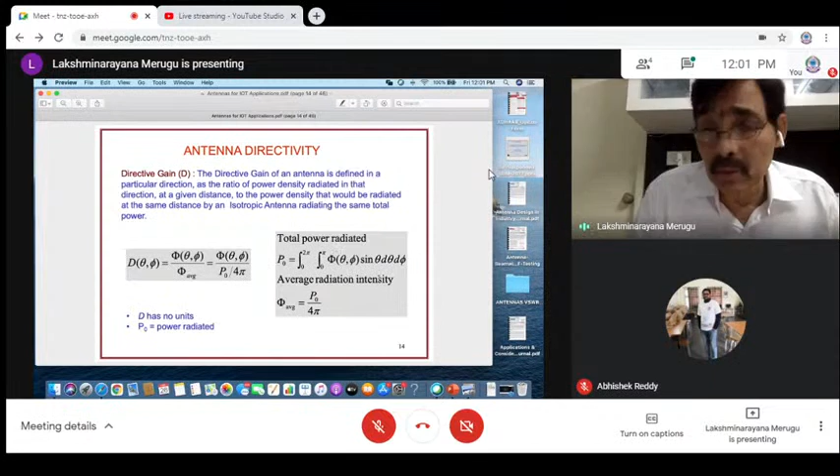Now, suppose what shall I do - do I all the time use these bigger equations? Should I solve all of this every time, with phi, theta, integrals from 0 to 2 pi, 0 to pi? This is required only for the designer's part of it. For a user of the antenna, a system manager, say a signal processing person or a communication engineering person, you need only an antenna - you don't need to know the design part of the antenna.

In such cases, say you want a gain of 10 dB. If you want 10 dB gain, what do you need? A certain beam width is required, so 30,000 divided by theta 1 multiplied by theta 2. Theta 1 and theta 2 are the 3 dB beam widths in degrees in the orthogonal principal planes of the antenna.

Suppose theta 1 is 3 degrees, theta 2 is equal to 1 degree. This will become how much? 10,000. 10,000 is equal to 40 dB.

Otherwise, if I say 30 degrees is theta 1 and 10 degrees is theta 2, it will be only 100. 100 means 20 dB. Like that, you can approximately, to the extent possible, as a system manager, this is very much a requirement, and even an interview type question.

If the azimuth and elevation plane beam widths, otherwise E-plane and H-plane beam widths, are given, we can estimate the gain. Now, impedance.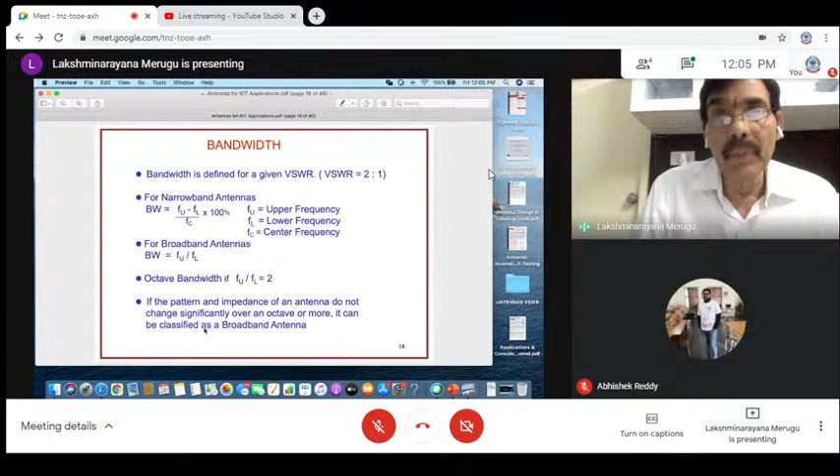Now, antenna polarization - suppose if you take a mobile phone and want to keep it like this and say, okay, I should receive it. When you lie down, you will keep the mobile phone like this. So irrespective of the orientation of the mobile phone, we intend to receive. That means the polarization is the orientation of the electric field of the wave.

This can be vertical, this can be horizontal, this can be circular also. So the polarization is the orientation, the E vector rotation, as the time passes. Now the polarization is broadly of two types: linear polarization and circular polarization.

The linear polarization is vertical, horizontal, or slant polarization. So vertical means vertical with respect to what? Vertical with respect to some reference ground. This is vertical; with reference to the ground, it is horizontal polarization. We see the E vector keeps rotating as it moves in time.

So normally there is nothing like pure circular polarization - it is an elliptic polarization generally. So it will be right hand circular or left hand circular. The axial ratio is the ratio of the vector with major axis to the minor axis - called the axial ratio of the polarization. Now looking at this, certain antennas we will see about this.

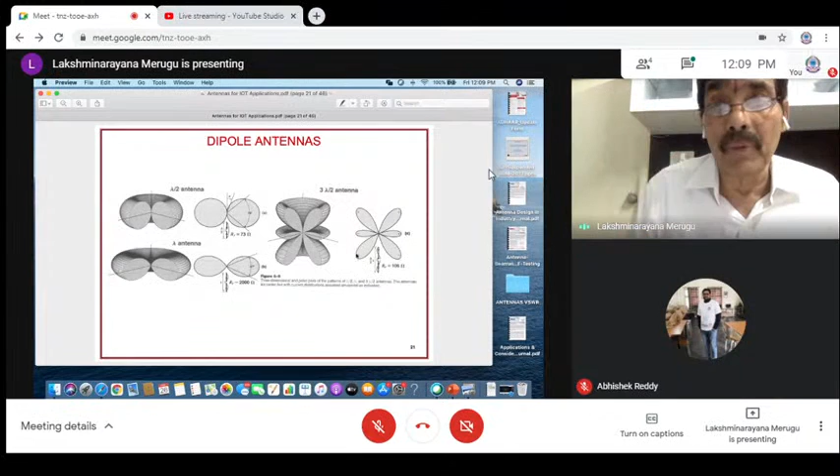Now, a ground plane will produce an image current having a phase shift of 180 degrees with respect to the original one. A ground plane, suppose if I take the ground plane horizontal like this, it will produce a phase shift of 180 degrees, producing something like this, and the resultant is going to be zero. That is the reason - this is one of the boundary conditions on a metal, since a ground plane is a conducting material. So this is the first boundary condition.

Another boundary condition is that any electric field perpendicular to the conductor is continuous, meaning it will produce another image which is going to enhance. This is where we are - once we learn electromagnetic theory, we talk about boundary conditions. Applying the same boundary conditions here, we describe the properties of the ground plane.

Now suppose I need not take two elements - just using this property, I will take a ground plane. This will become a monopole. Instead of using two arms, I will use a conducting plate and connect the input to the antenna here. Instead of using lambda by 2, a half wavelength, I can use half of that - only a quarter wavelength. The mirroring principle creates an image of the monopole, transforming it into a dipole property, but the physical size is only the one which I showed.

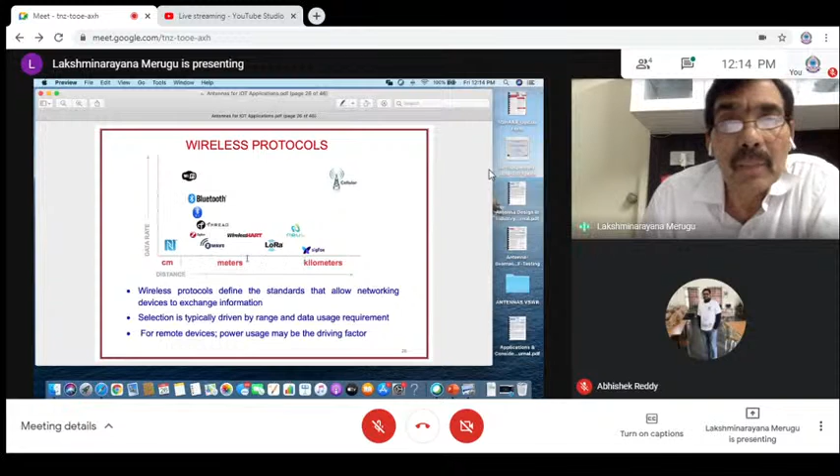If you look at these things, Wi-Fi will have the highest data rate. NFC is near field communication, order of centimeters only. Most of the protocols will be in the meters range, like 50 meters, 100 meters. Cellular and Sigfox are in the kilometers range. This is also the same thing.

Now, when we choose an antenna, we also need to choose depending upon the power. Power usage - in the first slide itself, I told how much power is required. It depends upon the data rate, and it depends upon the range.

Depending upon the range, as well as the protocols, power can range from 10 nanowatts to 100 watts. Desktop, laptop, GSM around 1 watt, palmtop, something like this. Hearing aids, RFID, electronic watch will use 1 microwatt. That means depending upon the power usage, we have to select the antenna. Some button batteries, AA batteries - these are all power requirements.

Most of the frequencies are the same for Zigbee, Bluetooth, and Wi-Fi. Wi-Fi at more than 2.4 gigahertz is also there, but they have different ranges. Zigbee's range goes up to 100 meters, and Wi-Fi is just 50 meters. More or less, the range is not very different for both. But the data rate ranges from 250 kilobits per second up to 1 gigabit per second. Zigbee type applications like home alarms, door sensors don't need a lot of data rate.

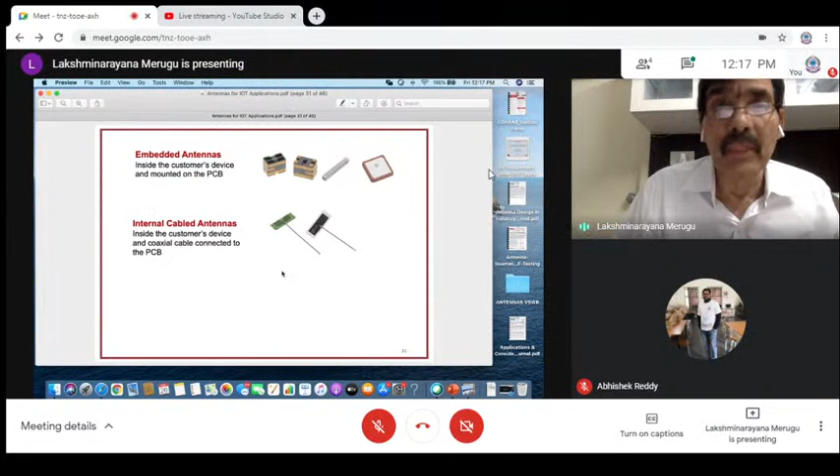Zigbee, I told you, is at 2.4, but it is also at 915 megahertz. Z-Wave is 2.4, Bluetooth is 2.4, Wi-Fi can be 2.4, 3.6, 4.9, 5 gigahertz, even 5.9 gigahertz - people are also using that.

GPS is already there at 1575 megahertz, 1227 megahertz, and 1176 megahertz. Industrial IoT also uses 2.4 gigahertz, LPWAN, medical, avionics, like this. All these things start from a minimum frequency of 433 megahertz, where LoRa is used in Asia, up to about 4400 megahertz or 5.9 gigahertz, which is the highest. So the popular ISM bands are around 433 megahertz, 915, 2.4, and 5.9 gigahertz - these are the four popular frequencies we deal with in IoT antennas.

Now, whip antenna and the ground plane considerations. Whip antenna is called that because it looks like a whip - just one second.

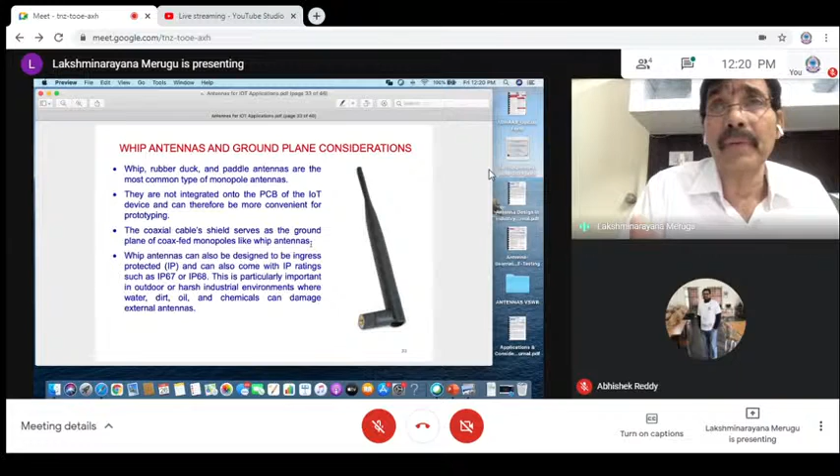Whip antennas can also be designed to be ingress protected. If I have to mount this antenna outside, it needs ingress protection, called IP67 and IP68. These save the antenna from outdoor harsh environments and industrial environments where water, dirt, oil, and other chemicals may damage it. You must have seen Wi-Fi antennas hanging in corridors, something like that.

Now take this type of antenna - a quarter wave monopole at 433 megahertz. For understanding, take 500 megahertz. At 500 megahertz the wavelength is 60 centimeters, so lambda by 4 becomes 15 centimeters.

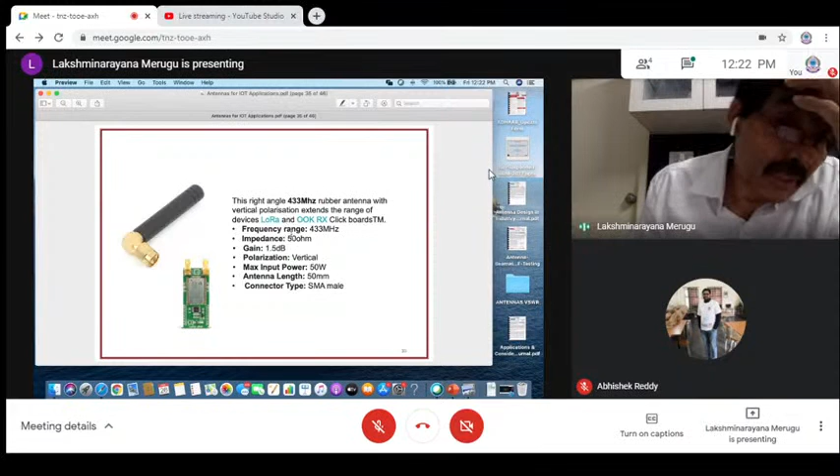These particular antennas are directly connected to the PCB, directly connected, so this can be utilized for the LoRa protocol. That means an antenna has to follow the lambda by 4 principle recommendation, but we have to tailor it depending on the 50 mm or 20 centimeter requirement.

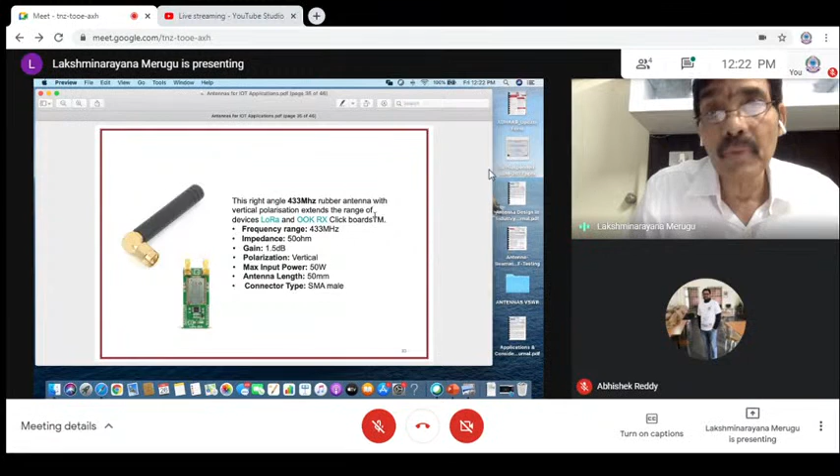Now, certain patch antennas can also be used. I'm not going into microstrip antennas since almost everybody knows them. Patch antennas are often used for IoT devices with GPS capabilities. Most GPS antennas, almost 100% of them, are either right-hand circularly polarized or left-hand circularly polarized. Patch antennas can also be designed for dual polarization.

This can be reconfigured by switching a perturbation element with pin diodes, meaning I don't have to use different antennas for LHCP and RHCP. The same antenna can be switched between LHCP and RHCP. This is what we have done - actually my scholar got a PhD in reconfigurable antennas.

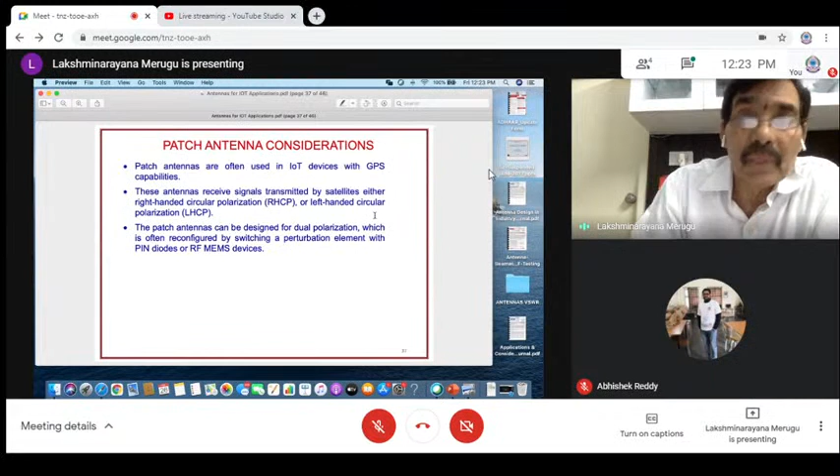Now another important consideration is chip and PCB antennas. There is a chip antenna - you must have heard about chip resistors and chip capacitors, but we rarely hear about chip antennas. Yes, it is true, chip antennas are also available. IoT devices with embedded antennas like chip and PCB antennas have their benefits, fitting into smaller places.

These are the conductive traces. PCB antennas often involve printing some conductors directly on the PCB itself and calling it an antenna. Yes, under certain conditions it works. There are different types like inverted F antenna, L antenna. Most of these printed antennas can be called PCB antennas because we print them on the PCB. Why do we call it a PCB antenna? Because along with the antenna, if some circuitry is there, we call it a PCB antenna - otherwise it's just an antenna.

Suppose I print on an RT/duroid substrate, if I print a microstrip antenna, I still call it a microstrip antenna, not a PCB antenna. But we specifically call it a PCB antenna like this - I have other components, but still there's an antenna trace, so I call it a PCB antenna for Wi-Fi. The ground plane is of particular importance here.

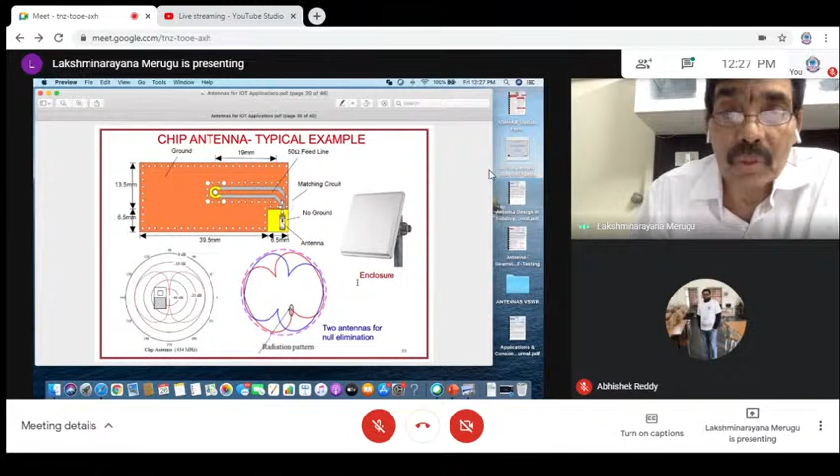Chip antennas are available for Wi-Fi 2.4 gigahertz, Bluetooth, WiMAX, GSM 380 megahertz to 1900 megahertz, CDMA, GPS. So for all these things, chip antennas are used.

Suppose inside a mobile phone, small these things are required. Now chip antennas are not just casual antennas—we have IEEE standards for that. Chip antennas have to comply with the electronic standards of the IEEE. This is 802.11, and it is a widely accepted wireless network standard.

Now, where are you using chip antennas? For the last 1 hour we spoke about 5G, 4G and all those things. But there, instead of the full antenna, somewhere we will be using these also. Chip antennas are utilized across a breadth of telecommunication products. This is where I told you IoT antennas come under the communication antennas.

This includes PC peripherals, cell phones, PDAs, tablet computers, portable television, satellite radio, headsets, USB dongles, GPS and Wi-Fi, WLAN—chip antennas can be as widely used as the chip resistors we use in electronic circuitry.

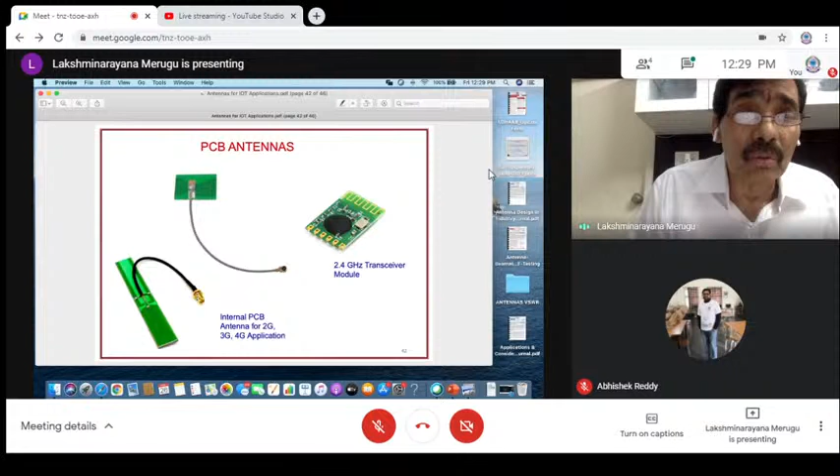Another thing is the 2.4 gigahertz transceiver module. This is again an antenna here, shown in gold color. This is the antenna, a PCB antenna here. These antennas are mounted on the PCB, and connected to it. So they become part of the whole PCB—that's the reason they call it the PCB antenna, right?

Now, looking at the PCB antennas, what's the big deal? How is it going to be different from the antenna community? No—it still follows the same general antenna properties which I have discussed earlier.

That is PCB substrate dielectric properties, thickness of the PCB, length, width, bending of RF traces, vias, component footprints, active components present, because there may be so many other components. This antenna has to work in presence of them, how these have to be isolated when a lacquer coating is given, whether lacquer coating is given onto the circuit as well as the antenna, and if so, whether it will lose its properties. These are all to be seen.

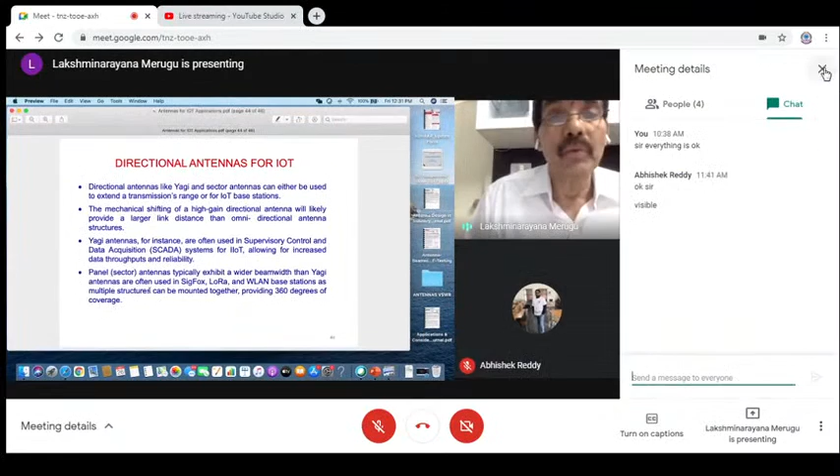The last one, directional antennas are also used for IoT. Why do we use them? For longer distance coverage, mostly Yagi type of antennas are used and sector type of antennas are used. Since these are very popular antennas, I am not going to touch much on them.

Yagi antennas are normally used for SCADA, supervisory control and data acquisition systems, for IIoT, industrial IoT. So though Yagi antenna is our old friend, the moment we say it is an IoT antenna, it is not going to be different from the antenna community. Some antennas we are hand picking depending upon the application we use for IoT. The same Yagi antenna we use for TV, the same Yagi antenna we use for other applications. Depending upon the application, we use the antennas.

Panel antennas and sector antennas are not new, they are not exclusive for IoT. These exhibit wider beam width than Yagi antennas. Beam width is a requirement. When longer distance coverage is needed, gain, beam width, bandwidth all these things are important. Particularly, as I showed in the beginning, Sigfox, LoRa require some longer communication distances, longer ranges. So these are required.

WLAN base stations, multiple structures can be mounted together to provide 360 degree coverage. So suppose if one antenna covers 120 degrees, I use 3 antennas to cover 360 degrees, like our mobile communication towers in base stations. This is what it looks like, a Yagi antenna.

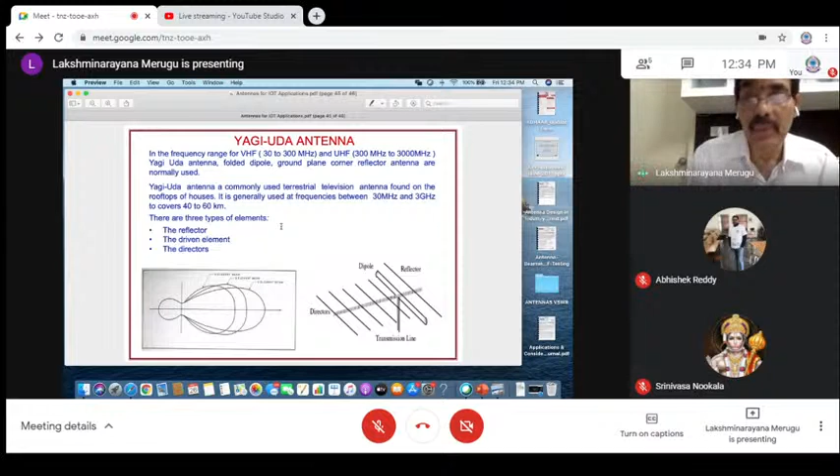Mostly, normally we use chip antennas for IoT applications where the size is very small but the gain is low, because the bandwidth may be just 1 or 2 kilohertz. So that works as long as cost is less, application is better, and volume is smaller. Can we use a chip antenna for a radar? We can't use it. It depends upon these factors.